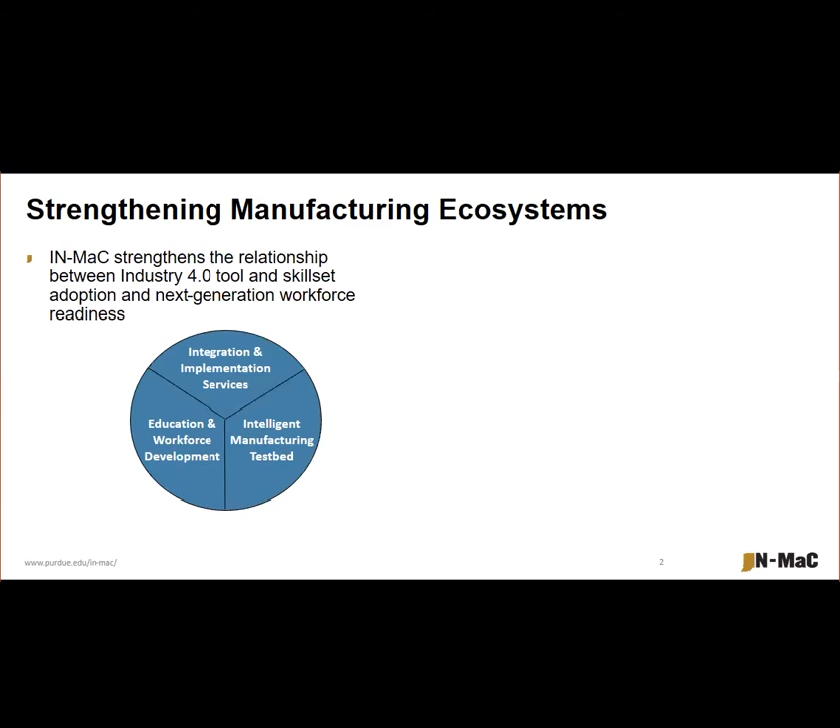We offer integration and implementation services in which we work with companies at their sites across Indiana to implement modernization projects. And more recently, we've added the Intelligent Manufacturing Testbed facility, which is a center that investigates ways for all manufacturers, regardless of their size, to overcome barriers to achieve Industry 4.0 in ways that work for them.

Two more remarks about the testbed facility. We do conduct research in smart manufacturing and the digital twin across all levels of the manufacturing enterprise. The center provides a platform for industry to develop and validate technologies to integrate and manage data streams across the product lifecycle and entire value chain.

The center includes a fantastic array of real-life production assets, including lightweight composites manufacture, injection molding, subtractive machining, subassembly, supported by rapid prototyping capabilities through integrated design and simulation suites, as well as some additive manufacture tools. Integrated into our manufacturing operations are also metrology equipment, in which we can provide rapid validation at the manufacturing cell, as well as offline. And through the manufacture of these real products, we leverage IoT technologies and real-time information streams to study and showcase ways to achieve Industry 4.0.

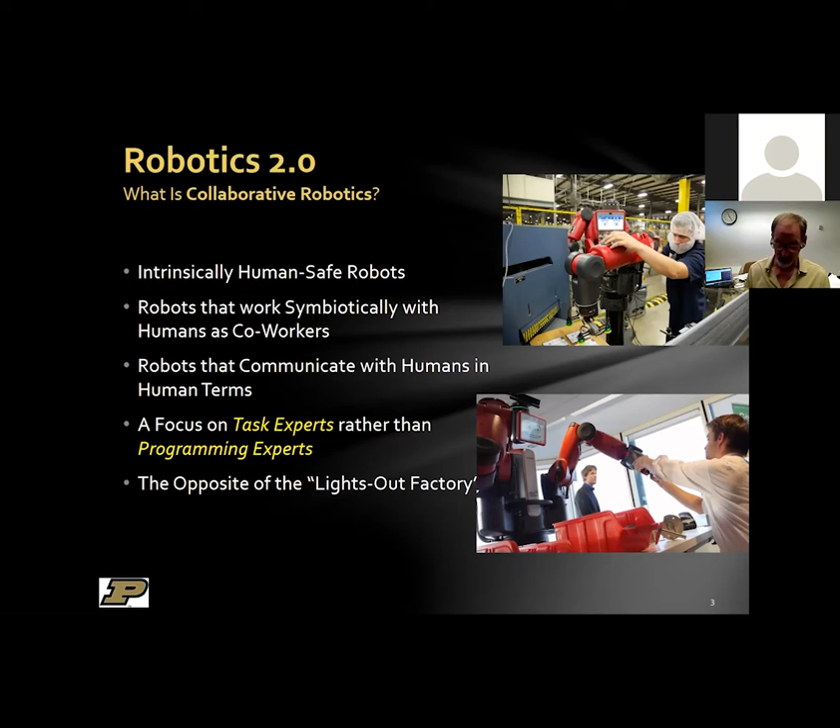And so again, we've been calling this Robotics 2.0. Let's also look back at what we meant by Robotics 1.0. I mentioned the lights-out factories, and that really was the goal for the first few decades of robotic development and deployment—the idea that there are certain dull, dirty, dangerous tasks that equivalently dull, dirty, dangerous robots could do.

In a manufacturing environment with no humans at all—the idea of full automation. That was this idea of the lights-out factory, and the idea behind it was that humans only needed to be in there to go and fix or repair the robots.

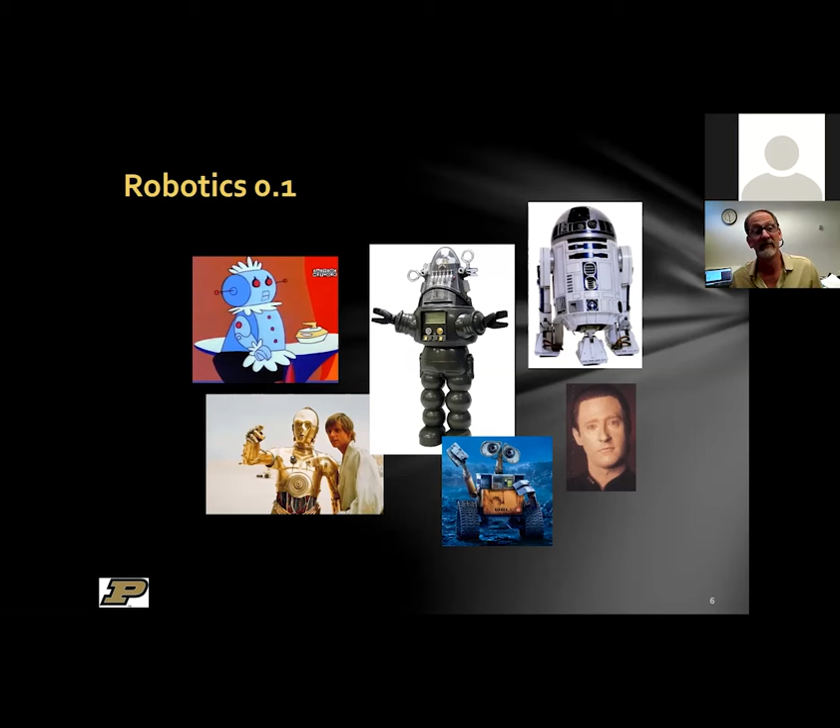But an interesting thing I like to point out about all these examples from science fiction is that in fact they're all helper robots. All these visions from our science fiction precursor to real robots interestingly focused not on the idea of the lights-out factory, but on the idea of symbiotic robots.

Nonetheless, popular application areas that robots are popping up, whether they're robots 2.0 or robots 1.0, co-robots or traditional, is many of these same areas: palletizing and depalletizing, material handling, machine tending, and of course quality inspection and assembly - we're seeing a lot more. These are kind of the classic hot button applications, at least the bulk of things, but they're going into many different areas as well.

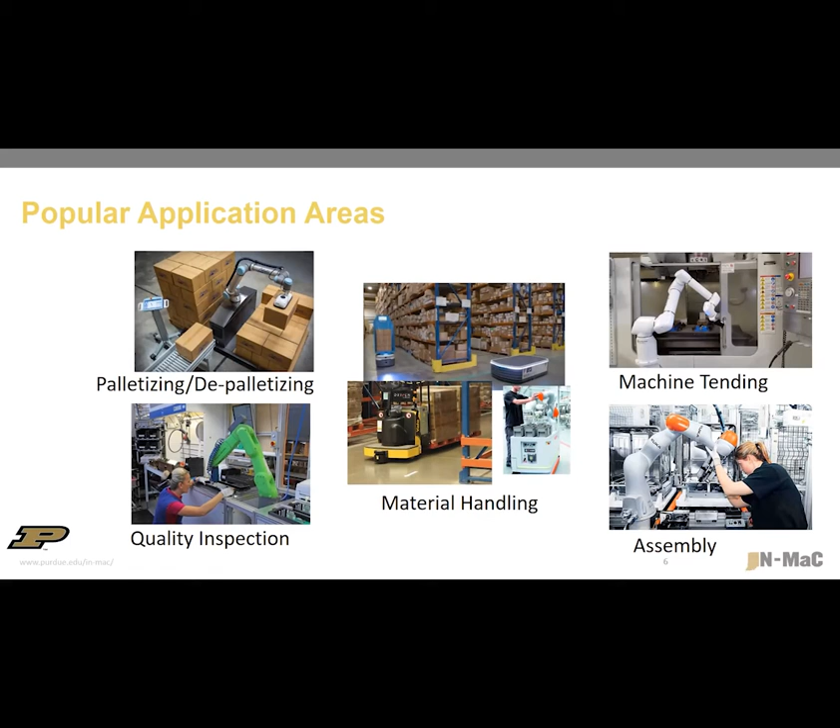When we're integrating a co-robot, a traditional rule of thumb has always been that the cost of integrating a robot into a manufacturing process generally costs 4 to 10 times the cost of the robot. The reason being, you have to do a risk assessment, pay for safeties and guards. There's a lot of feeding of parts and fixtures to register the parts, part presentation, the grippers themselves and part handling, conveyors and such. And of course a big effort is the software programming and integration with surrounding systems.

So when you're talking a cost of the robot on the order of $40,000 to $140,000, the overall cost by this rule of thumb is around $160,000 to over $1 million. But co-robots, one of the areas they're trying to reduce those costs is obviously the guards and safety systems are built into the robot - they're intrinsically safe, that's a way to save money. But the big issue is in integration and programming.

We're trying to make these interact with humans and traditional workers rather than bringing in programming experts all the time. And I want to point out, you still have to do a risk assessment even with cobots, but they are safe within manufacturing safety guidelines. The big ISO standard on safety is 10218 - that's been around for a long time, dealing with robots and robotic devices. There's this new standard, ISO 15066, which is the specific ISO standard on collaborative robots.

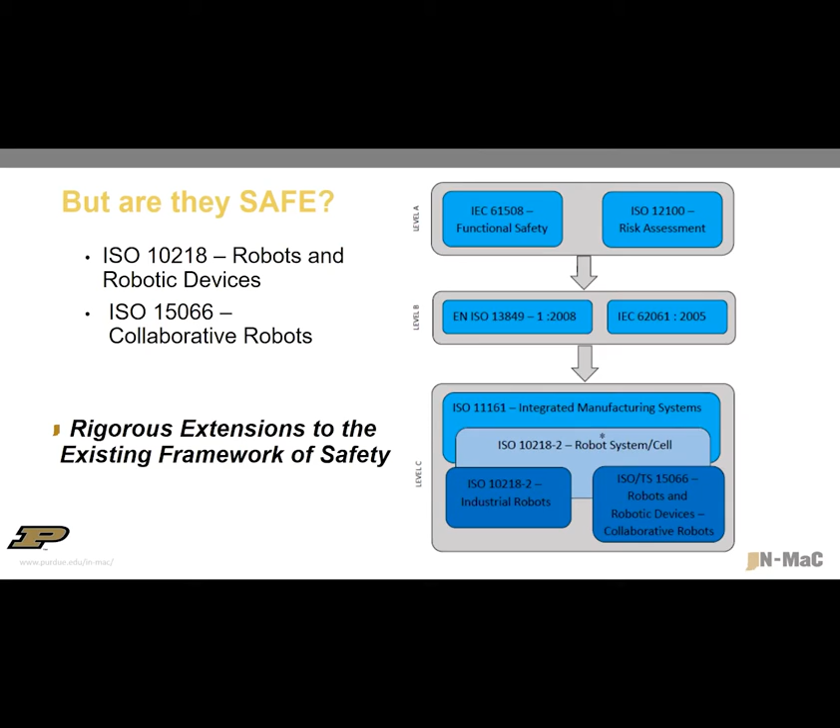And that's how this fits into the existing safety within the plant. This just allows for specific types of robots only - the elimination of certain types of fencing, but it's not an elimination of safety. It's an exchange of maintaining safe systems. I'm not going to go into the details of what the standard is, but just keep in mind that it is within the recognized ISO standards for safety.

So as we talk more about cost modeling, as I hand this off to our next presenter, I want to keep in mind these key considerations, whether it's robots versus cobots, 1.0 versus 2.0. Cobots still require a risk assessment. They are intrinsically safe, but you have to be concerned about the overall work cell, because safe robots can do dangerous things if given sharp things and that sort of thing. So a risk assessment is still necessary.

Many of the existing cobot applications we see out there on the factory floor are really traditional 1.0 kind of applications, just without the speed and the fences of a traditional 1.0 application. And that's a key aspect - cobots rely on lower speeds.

So when you're trying to get into collaborative robotics, it's important to think: is it really appropriate for my manufacturing task, particularly if you have an existing line with an existing takt time? Is it going to fit? One key aspect is if it's truly collaborative - if the human's doing something and the robot's doing something, what's going to happen if the human gets distracted? And as I'll say in closing, a broken arm does meet the ISO definition of a recoverable impairment.

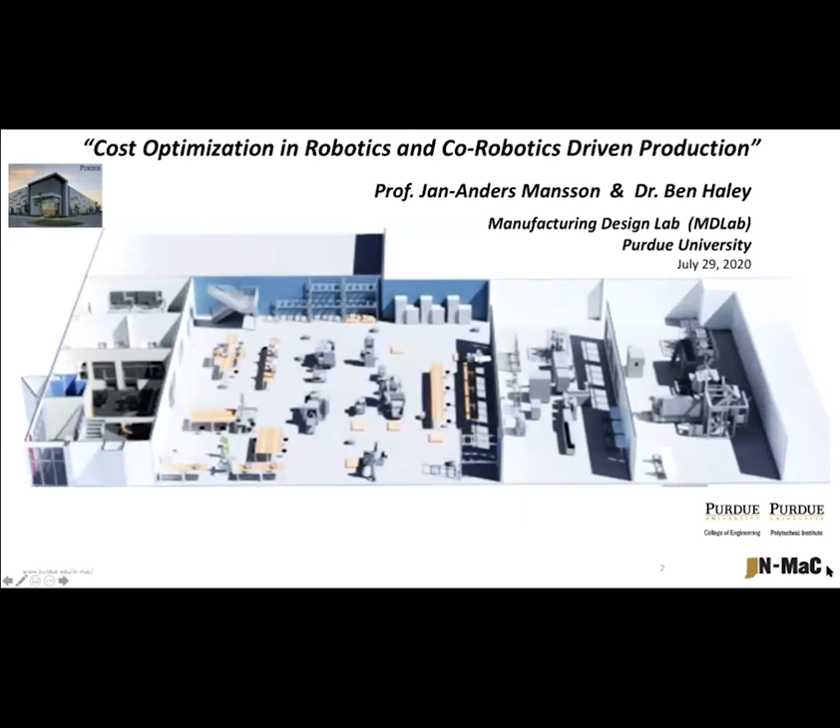So what we are going to look at is how can we estimate the cost advantages of different manufacturing alternatives. In this particular case we discuss today, it's low automation versus high automation. How can we get an idea about the cost?

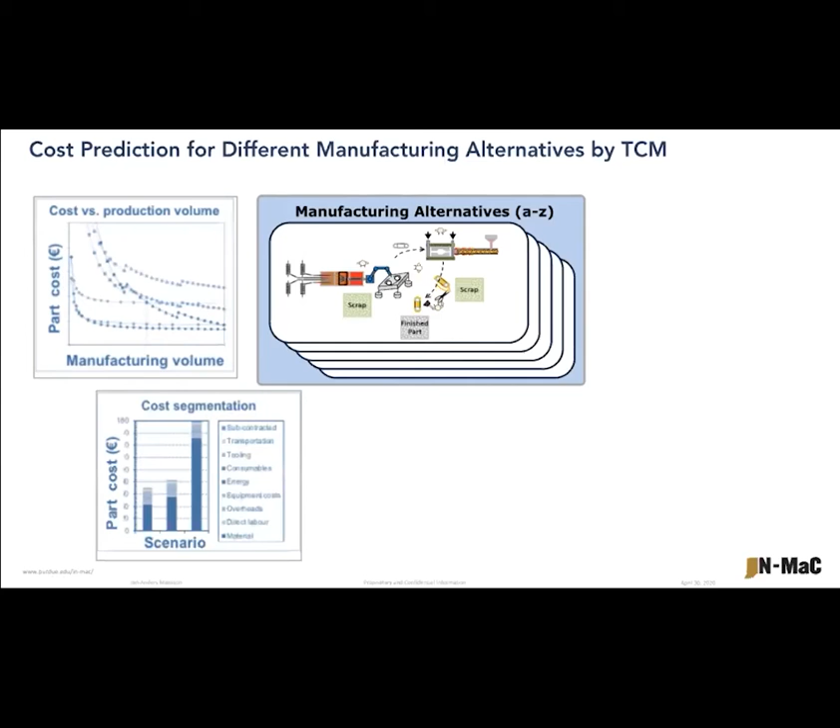This is based on work we do here in technical cost modeling. By setting up different production setups that Ben will show later on, how can we look at part cost versus volume? What is the cost segmentation? What is energy cost, tool cost, labor cost, investment cost?

And what is the potential, or what is the return of investment? Of course, when we invest in robots, we have a capital cost coming with it. And what is the cost sensitive to? This is more or less what our cost modeling tool provides.

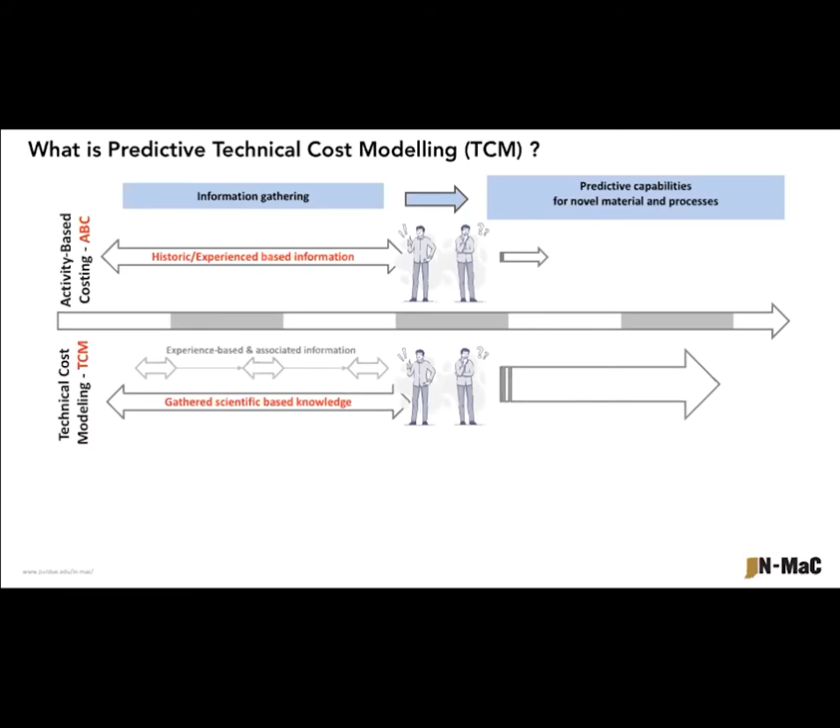Just to give you an idea what we mean by technical cost modeling, I'm sure most of you are familiar with ABC costing, activity-based costing, where you have information from history of your production, and by that you predict how the new setup will be. In the case when you go into new technology, new materials, or new equipment, you don't have enough history information. You have to take into account scientific information from that process or material. Technical cost modeling helps us have a better understanding of the predictive cost of our product, which is valuable when we want to implement new techniques or new equipment in manufacturing.

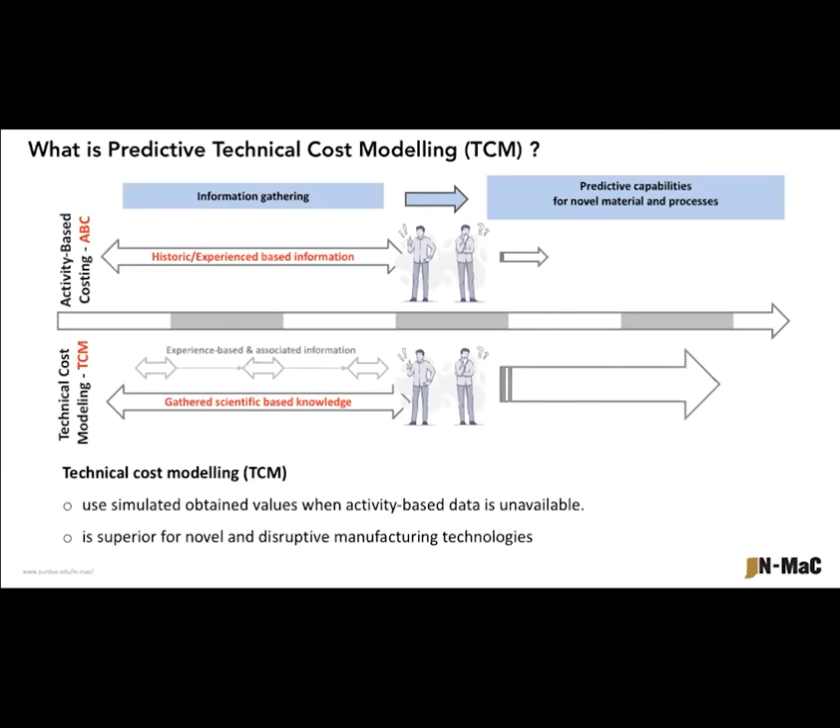This said, when we talk about cost here, we have to make it clear: if you look at the cost of the product when it's sold, it has everything including tax and profit. We are focusing on the manufacturing cost, what is variable and fixed cost. That's equipment, installation and purchase if needed, maintenance, plant operation, tooling, material costs, labor costs, consumables, and utility cost. That's the cost parameters we are referring to.

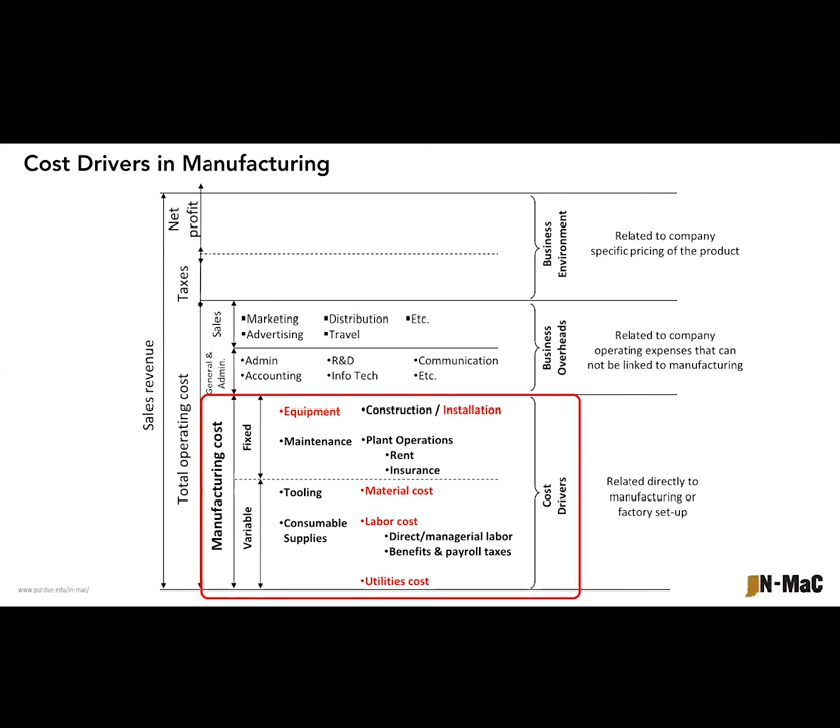In the next example here, we will show a made-up example so you understand how this technical cost modeling works. With this, I leave the word to you, Ben, and I will start this here and you take over.

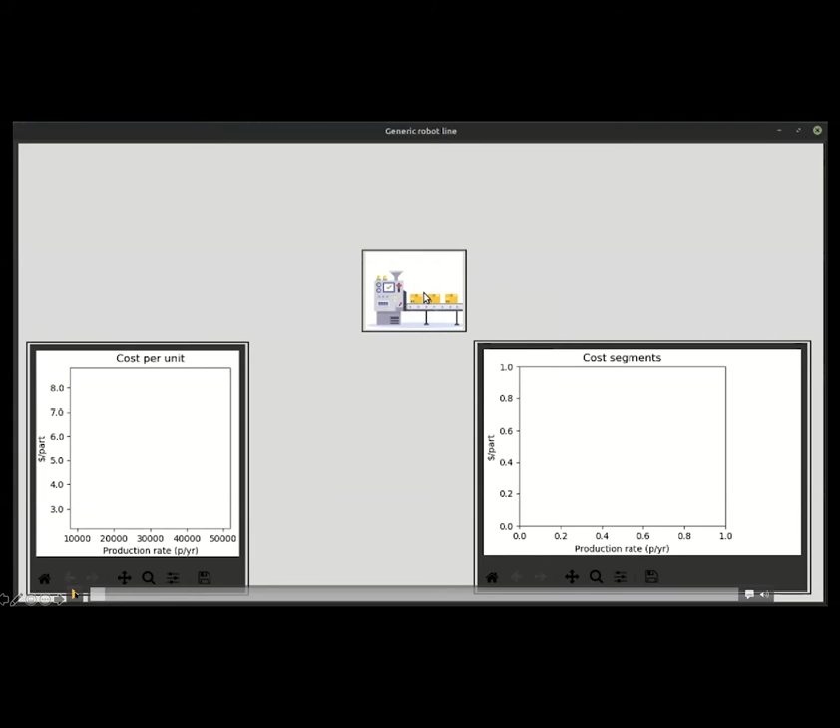Okay, can everybody hear me? Good. All right, so we've developed this software tool in N-MaC and MD Lab that allows us to lay out a manufacturing line in software. This is a simple demonstration of the capabilities.

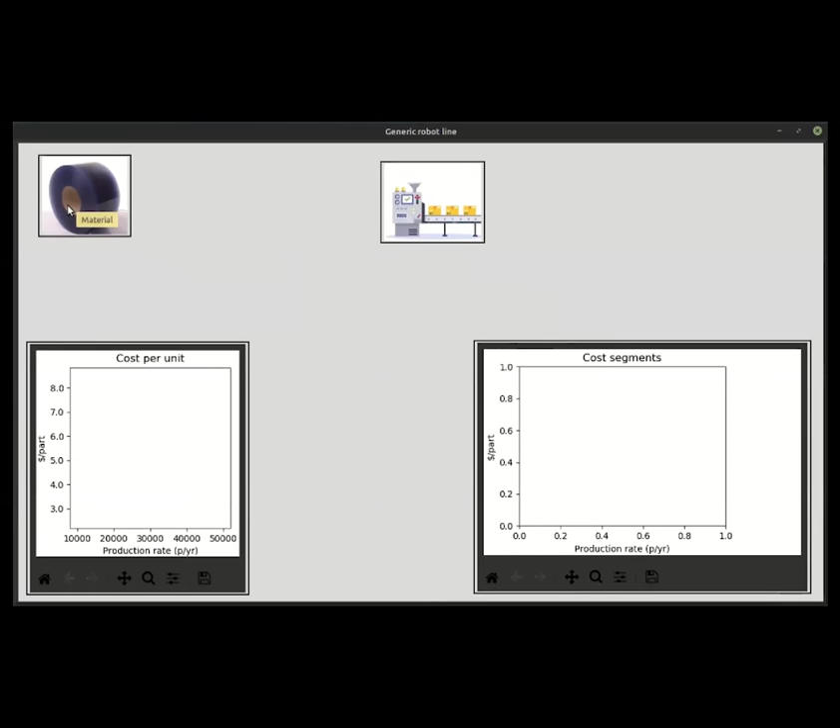So we have in this example just a simple machine, a generic abstract machine that takes in some material and produces widgets that need to be transported to a warehouse. We have different methods of operating the machine, starting with a human operating it. We also have choices about how to transport the finished goods from the machine to the warehouse, starting with the human doing that transport job as well.

Once we've laid out all the steps in our simple process here, we can connect them up. And once everything is connected, we can look at the overall costs and start to do some simple analysis on which cost segments are driving the cost at each stage.

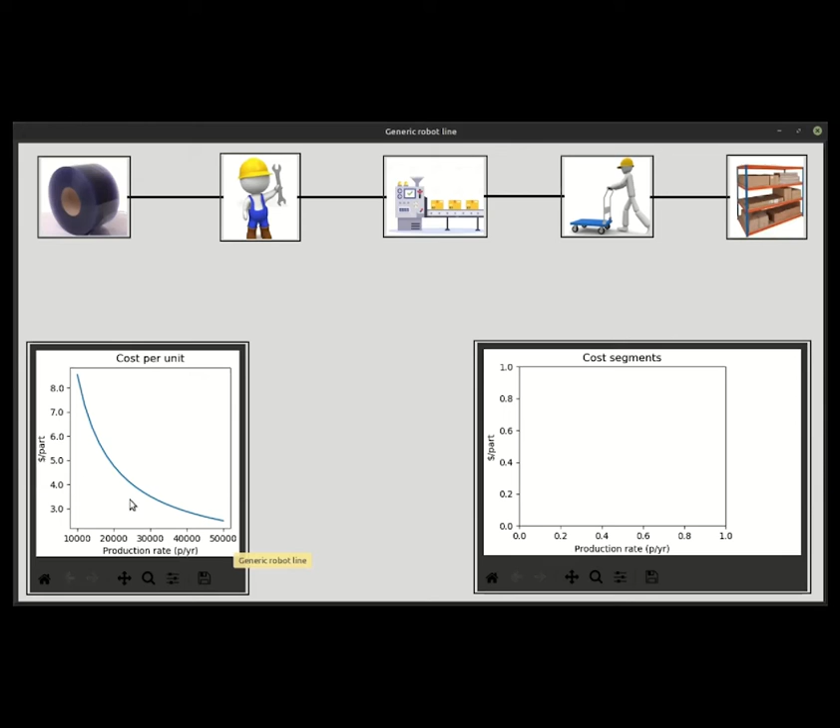We have a couple of plots at the bottom showing, first, the cost per unit manufactured. The x-axis is the production rate, varying from 10,000 parts a year to 50,000 parts a year. The y-axis is the cost per part, varying from over $8 per part down to less than $3 per part. The other plot shows how those costs break down into different segments, so we can track how much of each part is going to capital, labor, training, electrical power, and material costs.

Again, this is a simple example with just a few categories. We're demonstrating what we can do with this tool. We have a few parameters that we can vary for each one of these steps here.

If we change the hourly wage of the human operator, we can see live in the plots the impact on the cost and the cost segments, how the costs are broken down. Similarly, if we change the wage of the human doing the transport, or with the machine, which has a fixed cost maybe of $250,000, if we amortize that over 12 years rather than a 10-year lifetime, we can see again how the costs change. So these are the kinds of calculations we can do with this.

So in a robotics 1.0 approach that Professor Voyles mentioned, we can start to modify this line. We can say let's take the human transport out and replace it with an automated vehicle, a robot transport. So this robot would take the finished products out of the machine and transport it to the warehouse. We can just in the software change this up and see what the effects will be on our costs.

So once we have that line reconfigured, we can go and update our plots, and we can see the change in the unit cost from over $8 per part to less than $7 per part at low production rates. And we can also see the change in the cost segments. The cost now is not quite so dominated by labor.

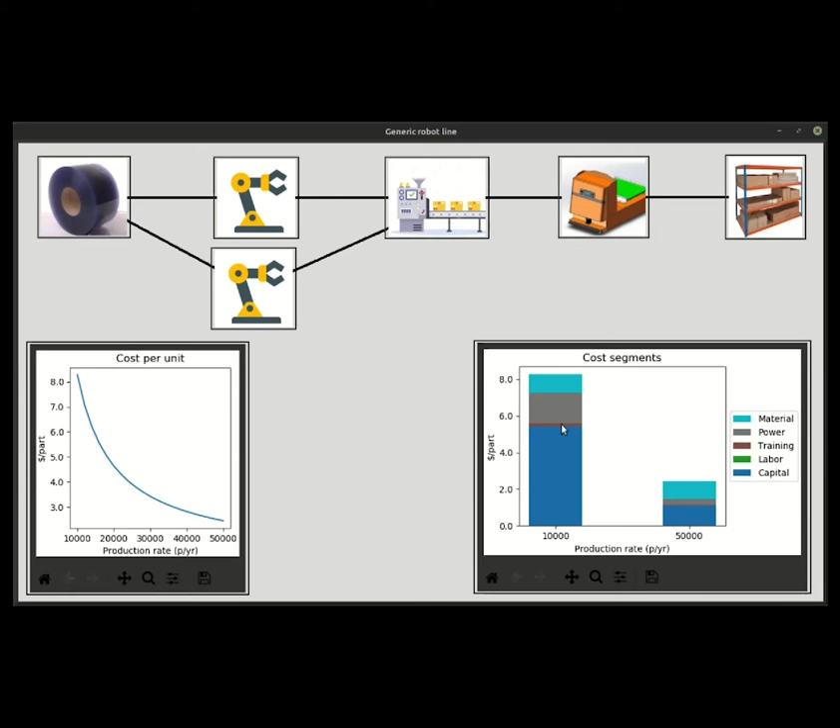We'll see in this example that's actually not a good move. It increases our cost per part, and that's largely due, when we look at the cost segments, to the increased capital expense. So we know just by playing with the different configurations in this software, we can explore different options with this simple manufacturing line.

Another thing that we can do is break out the specific costs and identify the cost drivers for each of these steps that are changing. So at low automation, we see the costs are driven by high labor costs. And when we go to high automation, the main cost drivers are capital and electrical power, both for low production volume and also for high production volume.

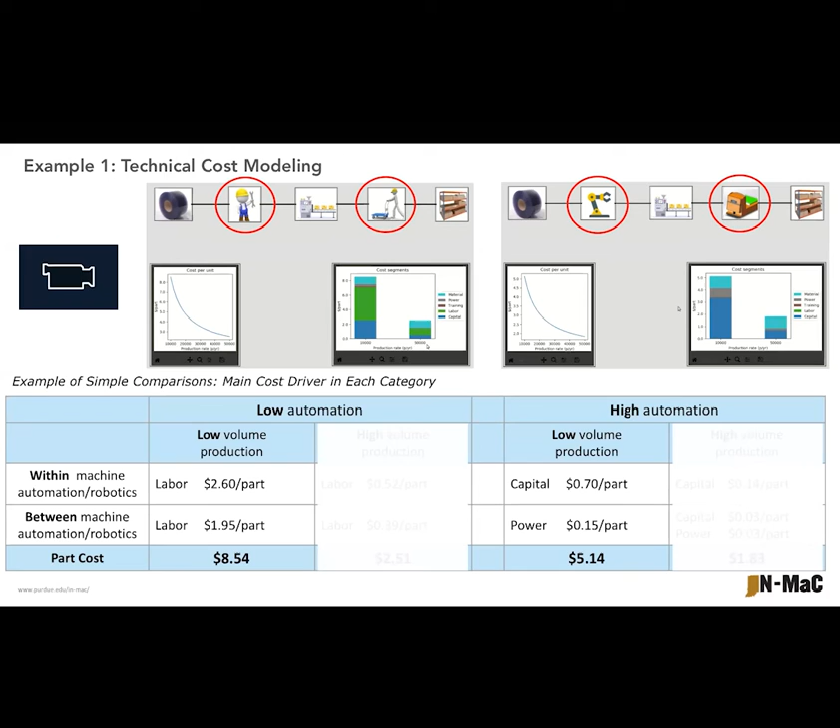If we go to the next, there you go, you see the same effect for high production volume. Labor costs are dominant at low automation, and capital and power dominate at high automation. Again, this is a made-up example to demonstrate what we can do with this tool. In the next example, you'll see a bit more involved calculation with many more parameters for something that we're actually doing here in the test bed at INMAC. So with that, I'll hand control back to Jan Anders.

Okay, so what you saw here is the principle of how the cost modeling tool works. It's drag and drop, easy to use, to get an estimation of what advantage I will have from a change I make in my production.

One thing should be said here, it's always very dependent on if the robot is dedicated just to this process or it's utilization based, meaning it can be used for other operations. And one of the advantages with a collaborative robot is it's easier to move for different operations. Sometimes we can go from a more high cost dedicated line to a utilization based robot, and that will bring down the cost. There is an advantage.

The next example here is a process that we have here at the test bed. And this is a new way of making composite parts, continuous fiber, carbon fiber parts. We primarily work with automotive here, examples with Volvo, Hyundai, and Ford in these examples.

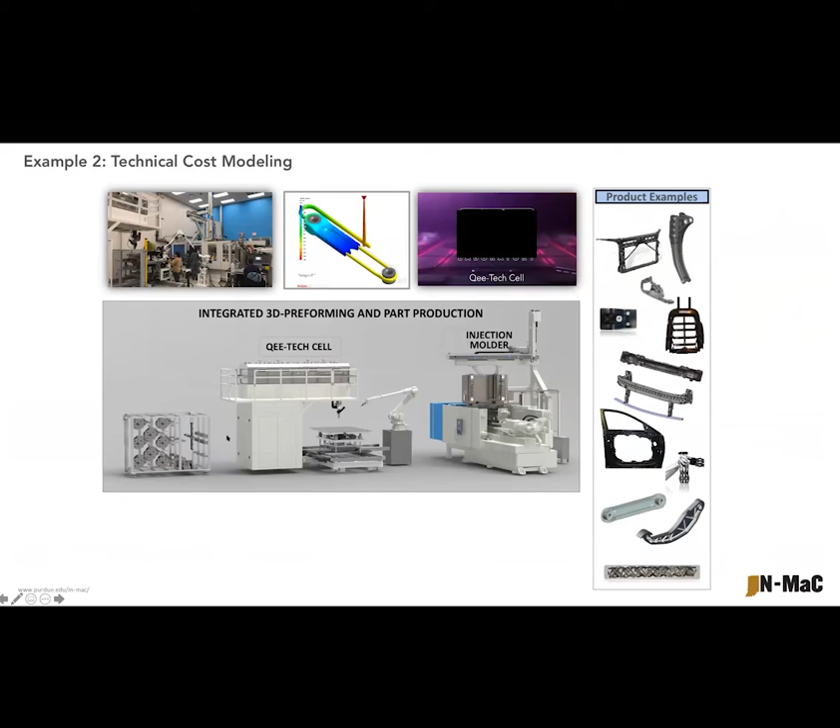So the process is that you start with your composite raw material, you make a skeleton that has all the load bearing capability. You do a second operation where you cover it, overmold it, and you have your final part. This is a simple link arm, but we have worked also with larger examples like car doors and so on. Let me show you a video here so you have an understanding of this process. And of course, you're more than welcome, when we can travel around, to come and see it.

So here you have the setup, the raw material. This is an oven. Here is a 3-axis table and a 3-axis movement of the head, so it's 6 axes together. We can create any shape that we want for this load-bearing skeleton. It's kind of a 3D printing, but the cycle time here lies between 1 and 2 minutes to make, also for making a car door.

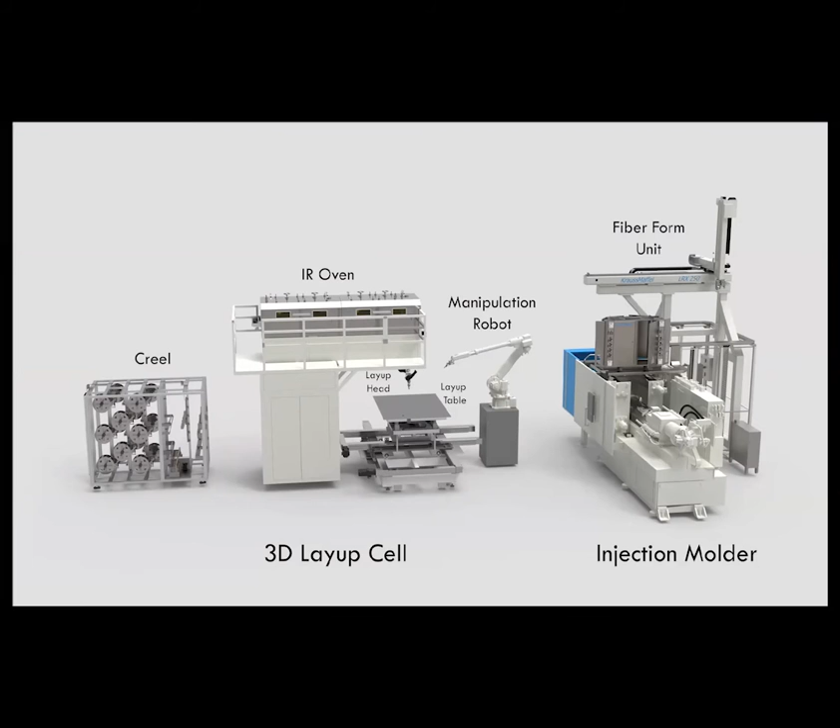Here is the raw material. You can follow the red dot here to the left. Here is the preheating, and here is the fixture for the layup of this skeleton. In this case, a very simple one. You see it laying around some bushings. That is going to be the load introduction point in the application.

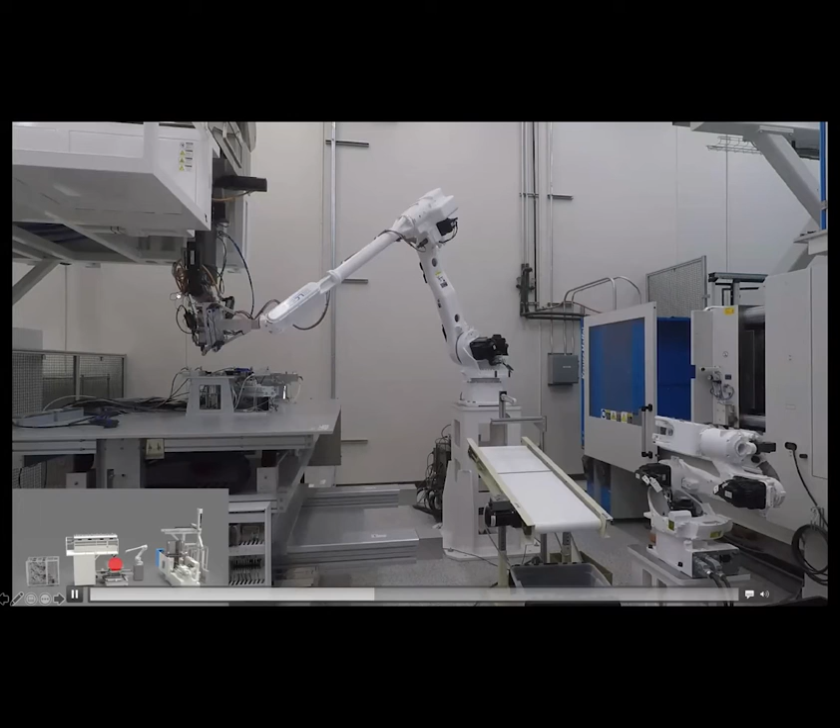Then it's handled. So the first one, this one to the left, is kind of a robot as well, but this is then the manipulation robot that handles the skeleton, and it's taking it into the injection molding machine. We say this looks very slow because it's done here with all safety precaution to not destroy anything of the equipment. Here it takes the finished part and it loads the new skeleton for the subsequent molding.

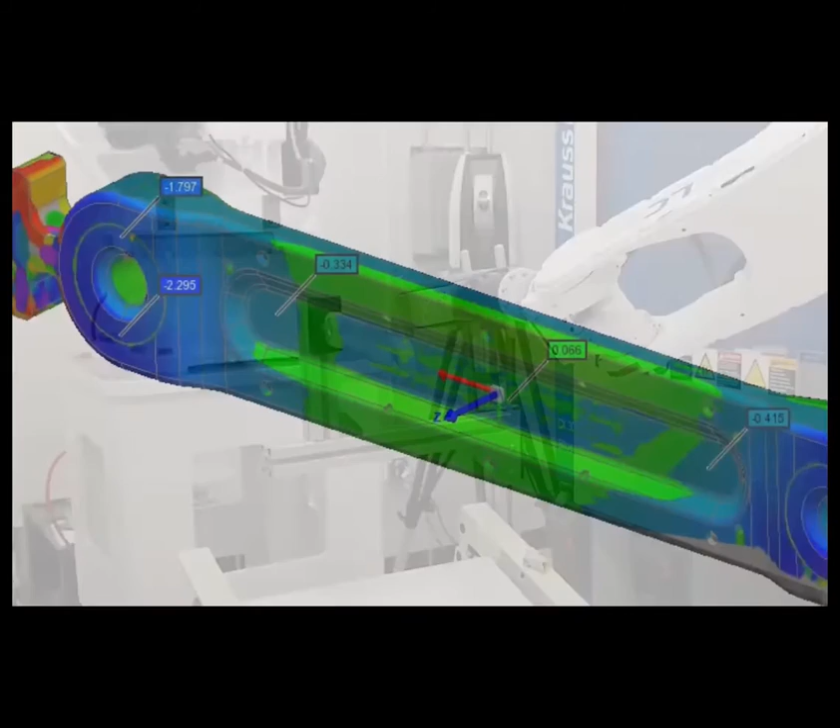It takes it out, and then there comes another robot that does the scanning, for dimensional control. So we have a full scanning of the product done with a Hexagon Leica system. So here you see the two elements, first the skeleton and then the finished part.

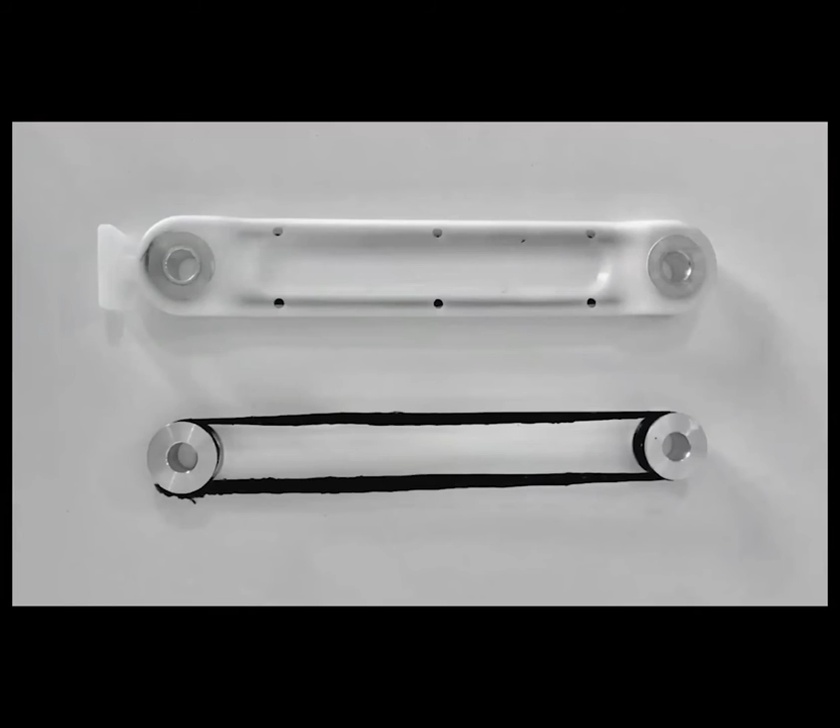So now you have an understanding of the process, and of course you saw there are at least 2 robots involved. So let's look now at 2 cases. We should say this is based on 300,000 parts per year, 3 shifts, 8 hours each, and 240 days per year. Here in this case, this is the setup, and around the ring here you can see the 2 robots.

In the low automation case, these 2 robots are replaced by a person operating this transfer and the quality check. Here you can see the investment on the left for this setup, it's about 1 million. And here it's about 125 less, and that more or less reflects the cost of the 2 robots that are taken out.

And as mentioned, in this case we are looking at manufacturing costs, but now we take in all the costs that we have associated with this. All those cost drivers, of course, are equipment, all the consumables, indirect and direct labor, compressed air, sewage, water, energy, plant operation, tool costs, and material. It covers all the cost drivers that are related to this process.

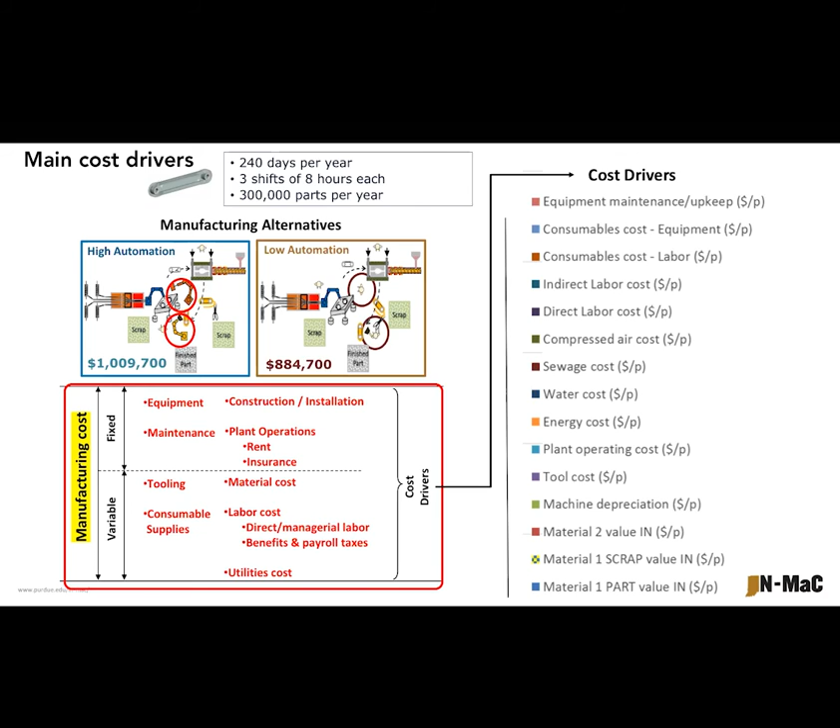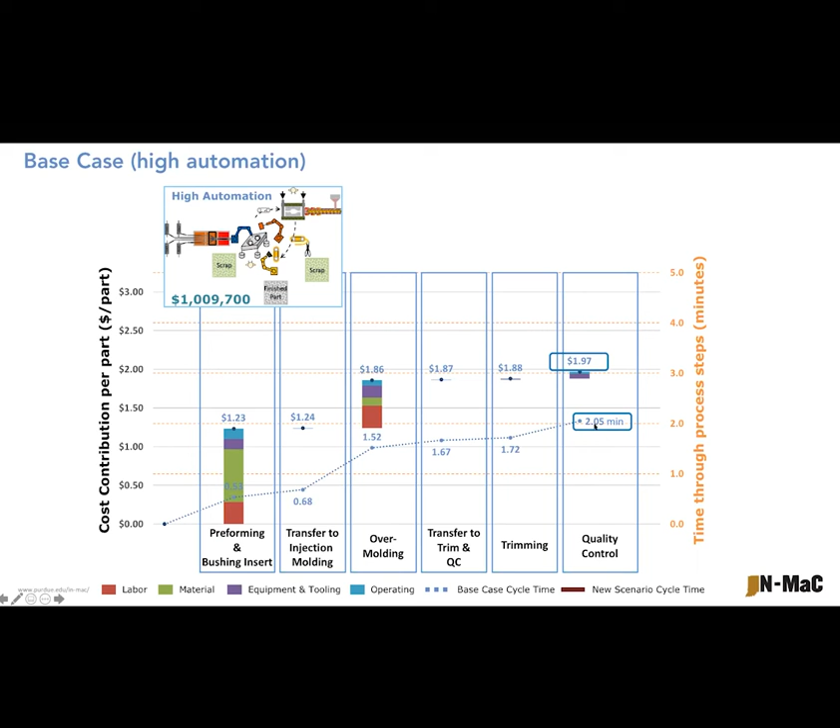So now we have got an idea of what this change in automation will cause us.

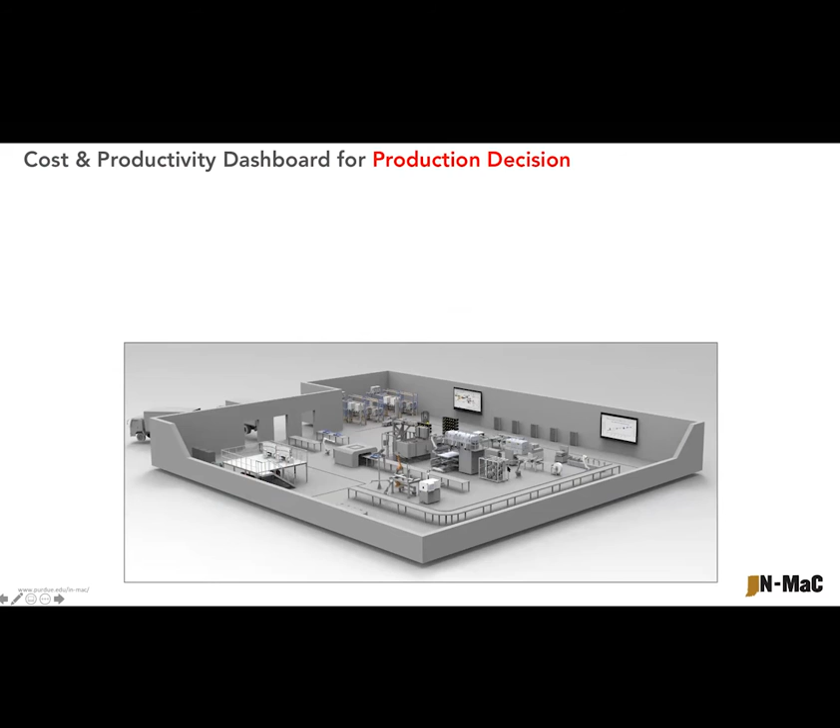So now if we go back to the test bed here at IMI, the equipment here in the middle is the equipment that you have seen on the video. Now we put sensors in as many places as we possibly can and have them interacting with the sensors of the production line. Now we talk sensors in the equipment. We can also have sensors in the application. And this information is then coordinated and shown on these screens that are on the wall in the manufacturing floor.

So here you can see the 2 cases, and you can follow the cost evolution, if you do a change, what will happen to the final cost or the different cost segmentations. So this is a way to move the information down to the production floor, so more people can be part of influencing the cost of the product.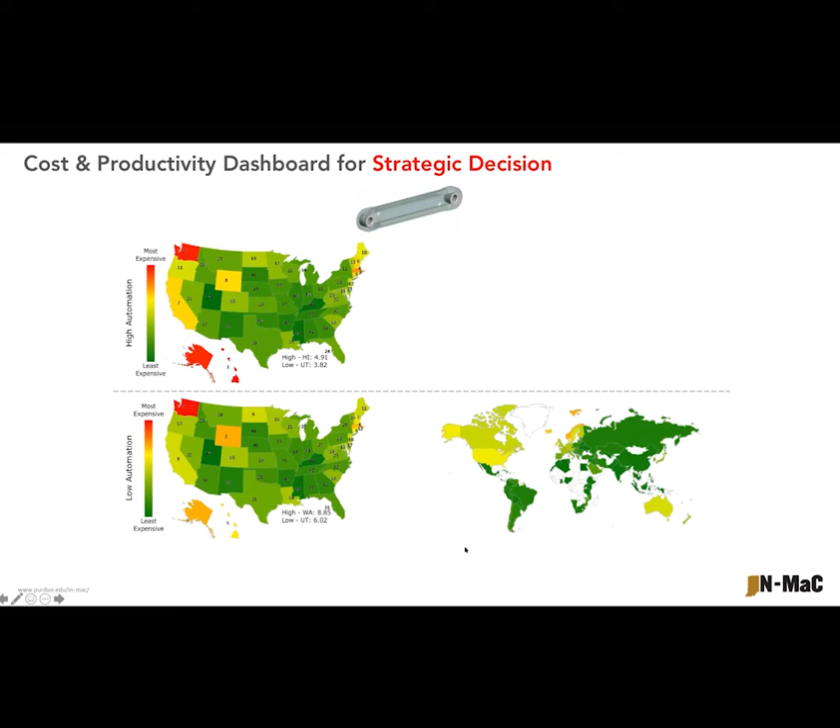And if we go to a high automation case, how it might change. This is related to energy costs and labor costs in different states. But we also looked on a global scale with data we had from a federal system here. One thing you can see: you should not produce in Norway, it's the least favorable if you have a low automation case. And if you're going to move a low automation production from Asia to America, the price will more than double on this part.

Now if we go to a high automation case and look at moving it, it's about a 50% cost increase of the part. And then you can say if in Asia they want to go to a high automation case, they gain maybe 8%, while we here will gain over 60% going to high automation. So you can see the competitiveness by automation if you compare on a global scale.

So what we have shown you here now is what we have in this part of the testbed. Here we make the raw material, here is the rest of the activity—subtractive manufacturing and also assembling. But it's all now being connected up, so we have all information flow going between the two sides.

This intelligent manufacturing testbed that we have here is really to be a platform for you—industry and university—to work in, to help accelerate digital transformation. Maybe before you start to involve too much of your own company and too much disruption of production, this could be a place where you can test and also get help with cost estimation. It's also to prepare students, teaching, and workforce development, with courses here at the testbed. And of course, being a network place where we hope we can help accelerate this kind of step in the Indiana industry.

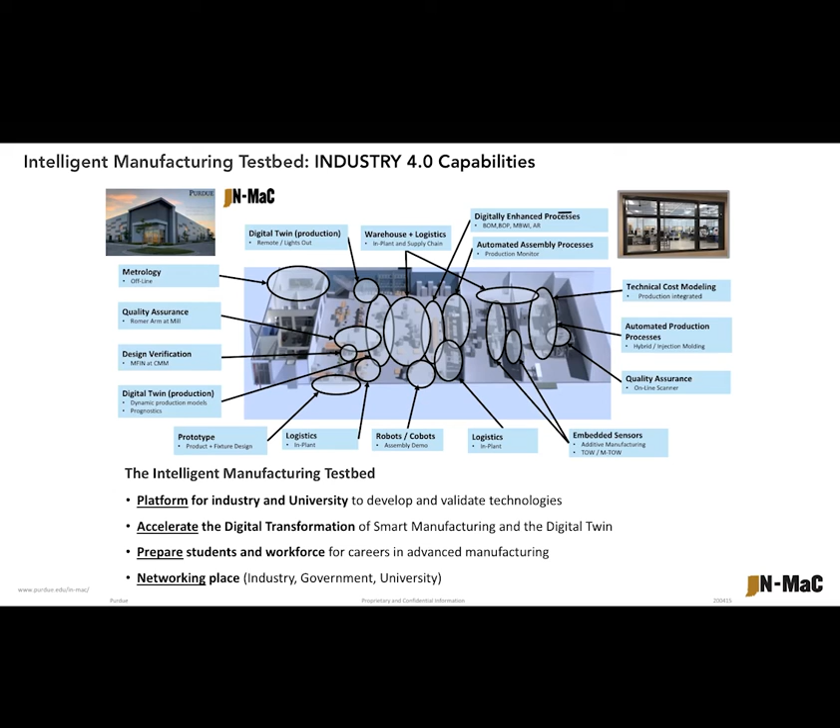I think by that, I'll now leave it over to Dave, who will talk about Industry 4.0 robot alternatives and how that can impact different examples that he will show.

Okay, thanks everybody. So as we mentioned, we're using collaborative robots, or co-robots. You can get all the same advantages that you just saw with automation, but they're even more dramatic in this case, since the co-robots themselves are cheaper, more flexible, and safer, so you can deploy them more places without a lot of changes to your current workflows or shop layouts.

So the first characteristic you want to consider is the payload—what's the total weight your robot will need to carry? Most of these robots' payloads do not include the gripper, so you need to factor in the weight the gripper might have, plus about 20% more for your part variability. The next characteristic is the reach—what's the farthest distance your robot will need to reach once it's mounted, including the drop-off location?

And depending on how complicated your workspace is, that would dictate how many degrees of freedom, or number of axes, your robot needs. For more complicated types of interactions or workspaces, you'll need an increased number of axes. And then repeatability—what repeatability is needed for your task? How precise do you need your robot to be when repeating these tasks?

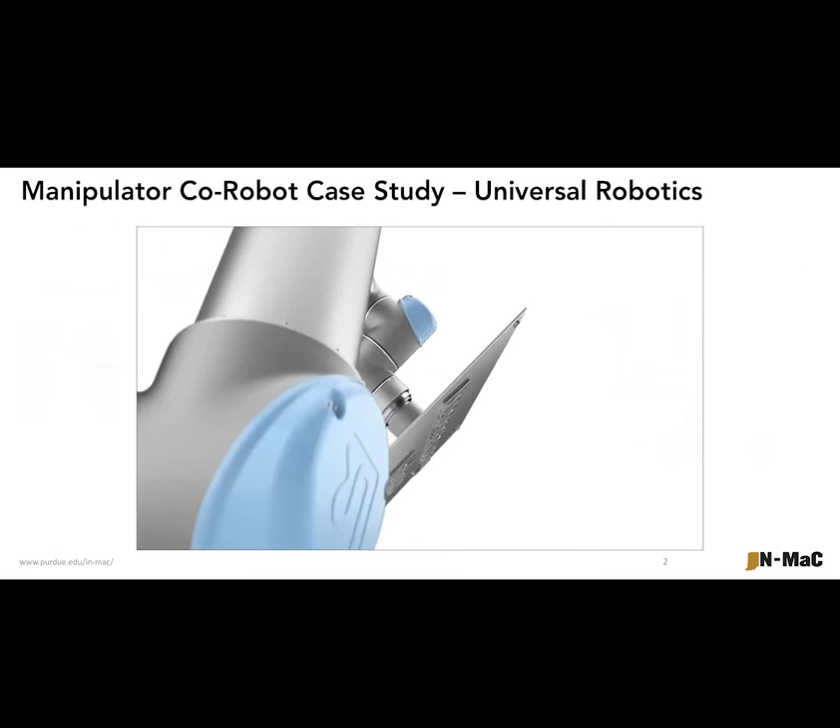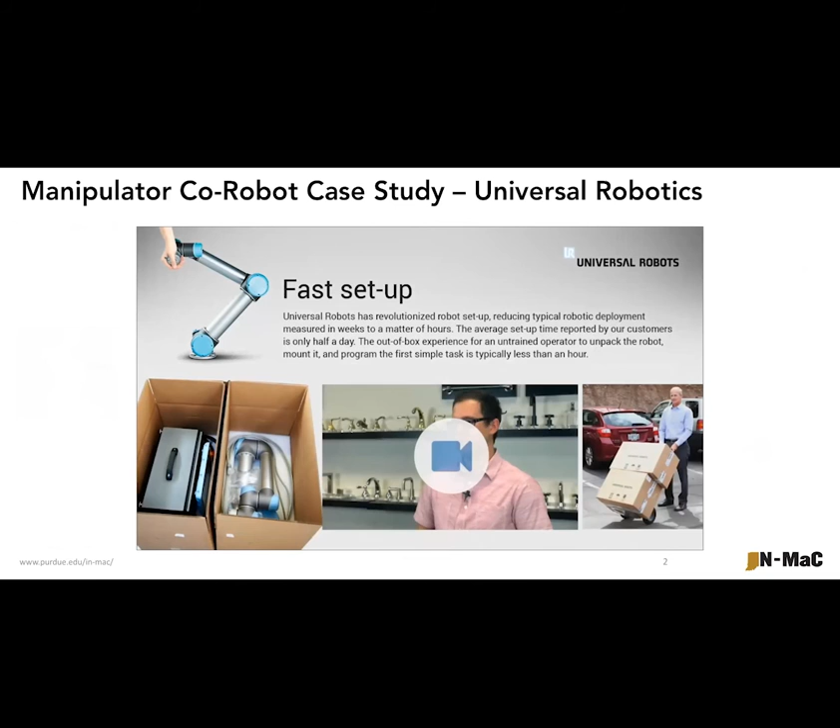Once it actually hit the floor, we got it unboxed and found a stand for it. Within 45 minutes, we had it up, powered, and were actually programming the robot, just doing simple back and forths and pick and place. It was really easy to use. I'd say it took a third to half of the implementation time out of it based on previous experiences I've had.

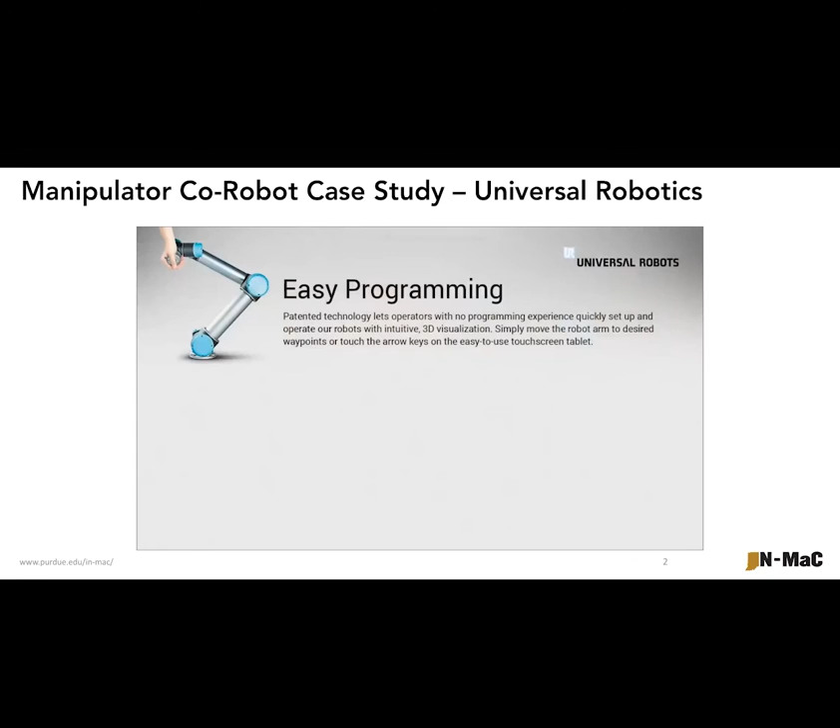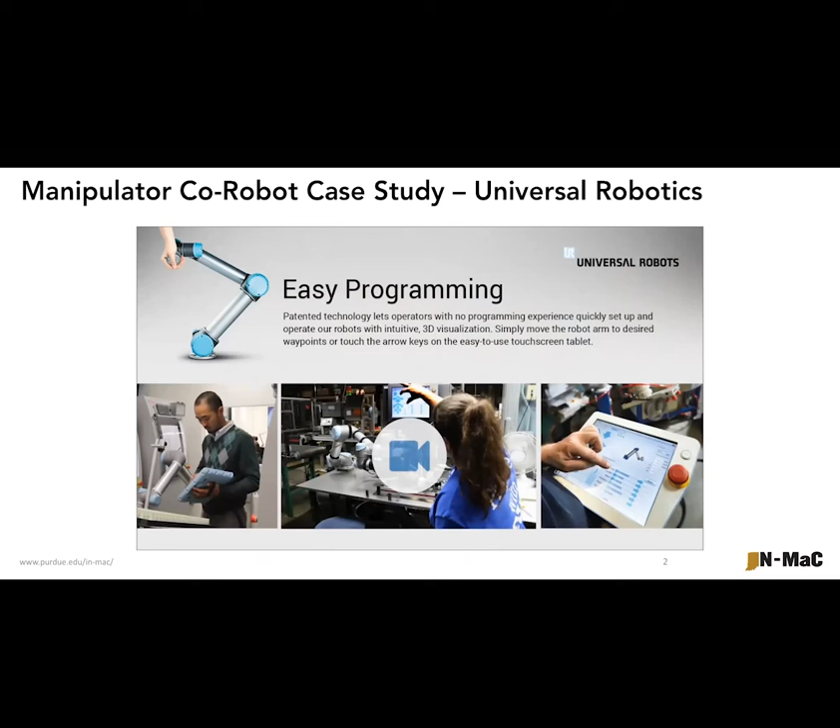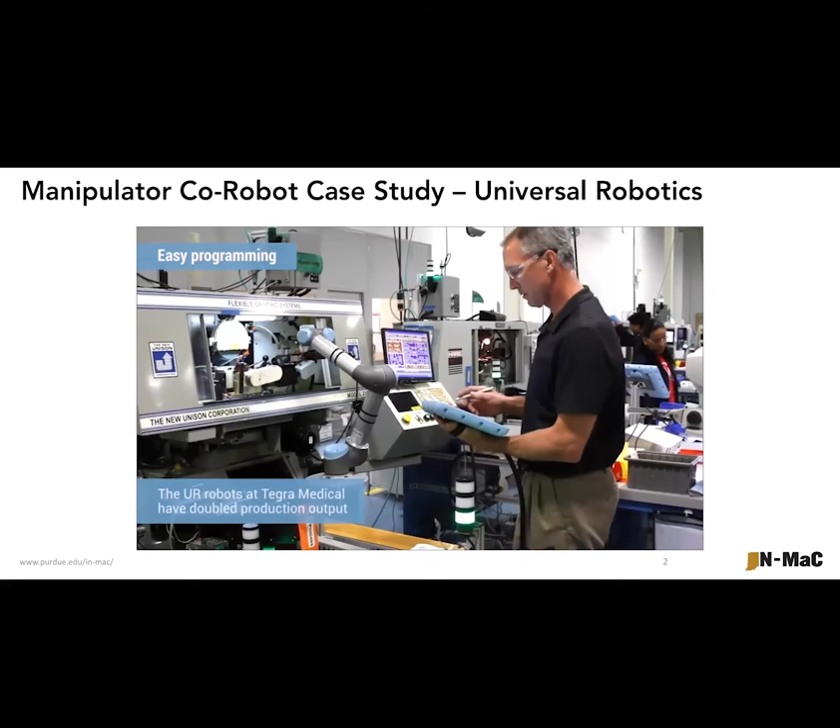The process of the robots were actually a lot simpler than I had expected them to be. If you can work a smartphone, you can pretty much work these robots. Programming the universal robot is very straightforward. Anyone with any sort of ability to think logically and can envision how a process ought to run could program the robot.

The screens are laid out friendly. The commands are almost self-intuitive. It comes with a manual that you can consult if you need to, but you don't need much of that.

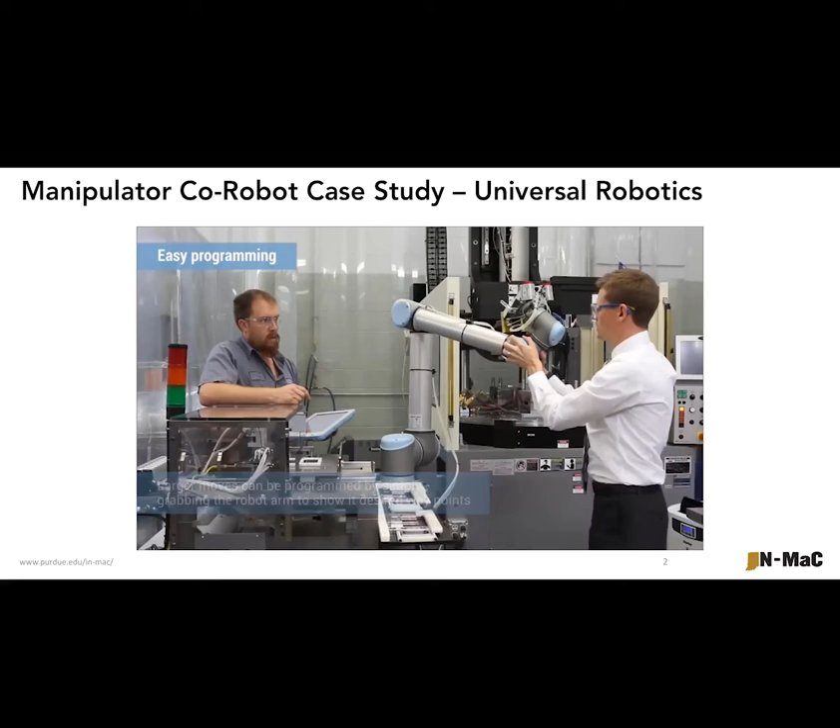When you push the button on the teach pendant, you can grab the end of arm and move it to whatever position you want, and then once you release it, it can set the position and teach it as a point. It made it a lot faster and easier to program that way. Honestly, if you can write a to-do list, you can program a robot. It's just simple top down logic, and it's fairly simple to do.

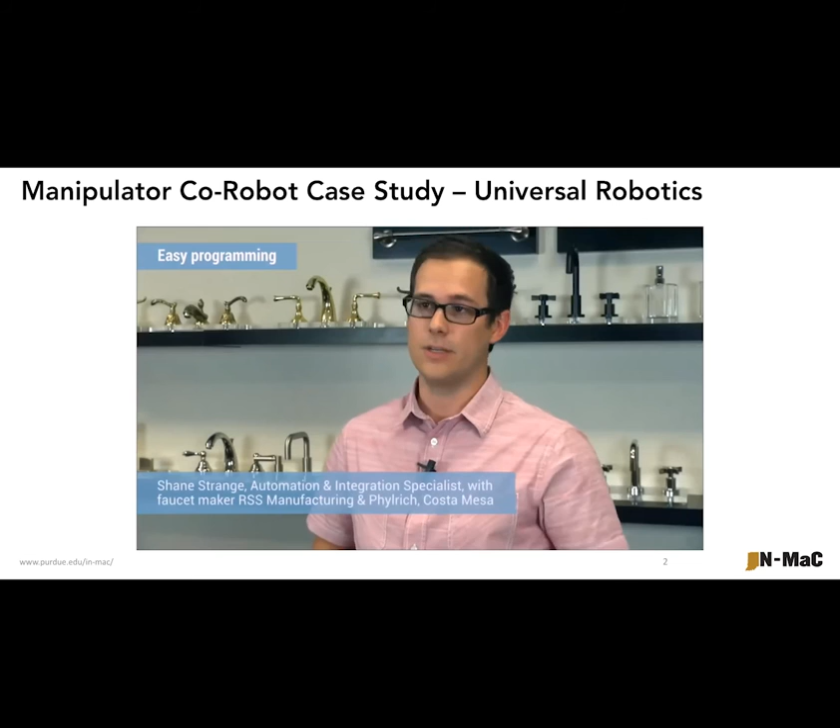The most beneficial part of the robot is actually the interface controls. You're right there with the robot, troubleshooting as you go. It takes out a lot of time, rather than me having to come inside the office, run simulations of my programs, take it back out, boot it up, and see real time what it's going to look like. You can actually do that from the handle.

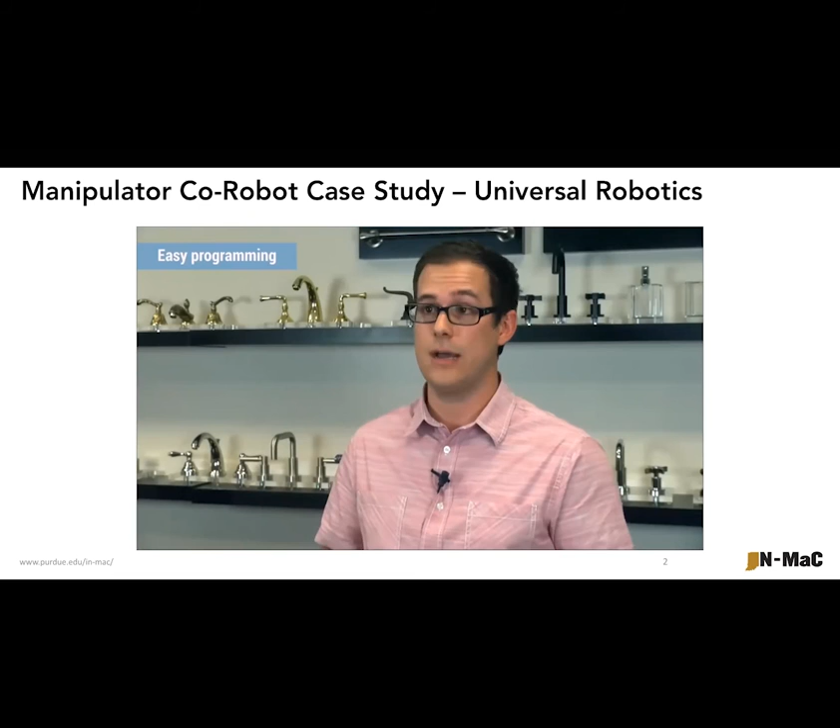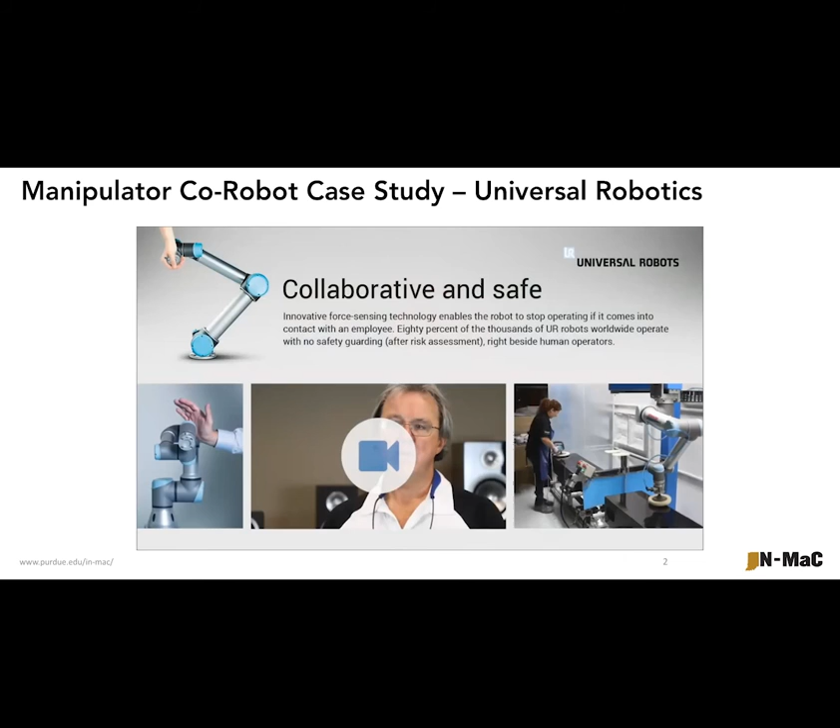The collaborative robot allowed us to have the robot and a human working in the same workspace. They're working in a tandem type of operation where they can safely interact. It's a very hand-in-hand kind of operation between the two.

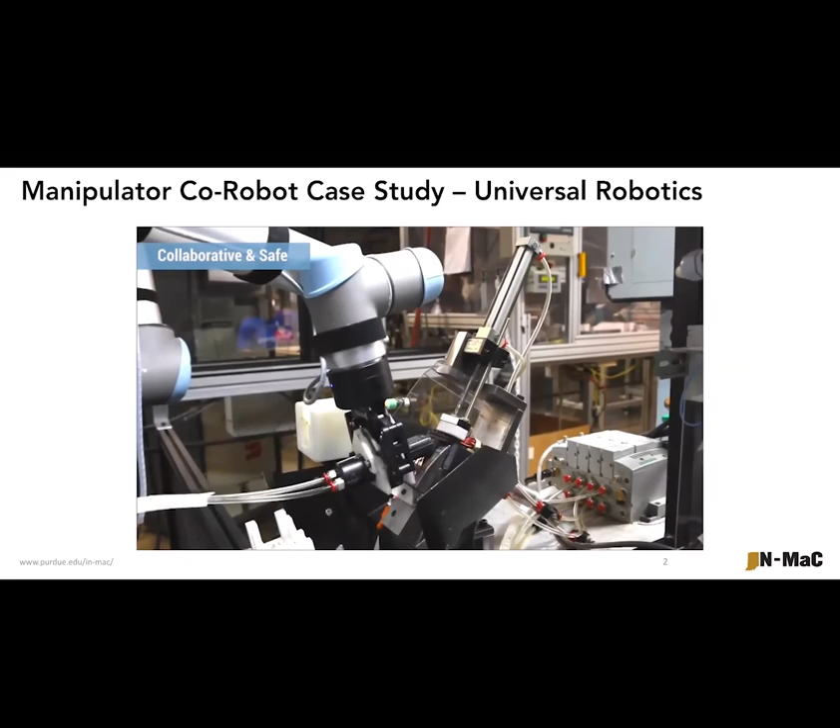We've got two robots working with humans. The first robot's actually cutting wires off of the motor stator. That's a potential carpal tunnel syndrome application. You're cutting about 16,000 wires a day by hand, so we thought that was a great place to put a robot and let it potentially get carpal tunnel instead.

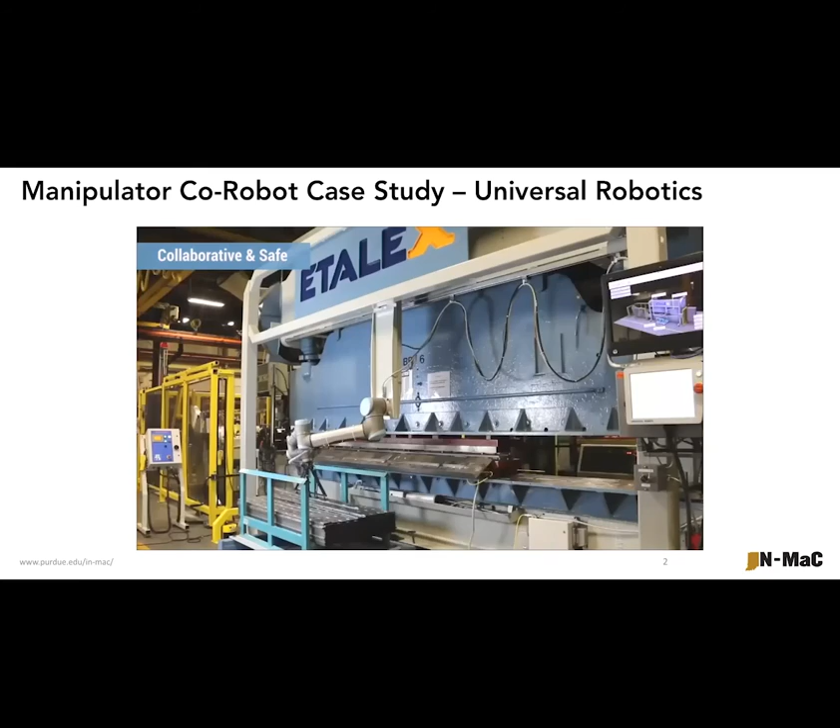The fact that the robot is a cobot, a collaborative robot, is important because I have no space in front of my production line. I only have 6 feet of space left, and it's not possible to install a regular safeguarding system. That's why I chose the universal robot for this application.

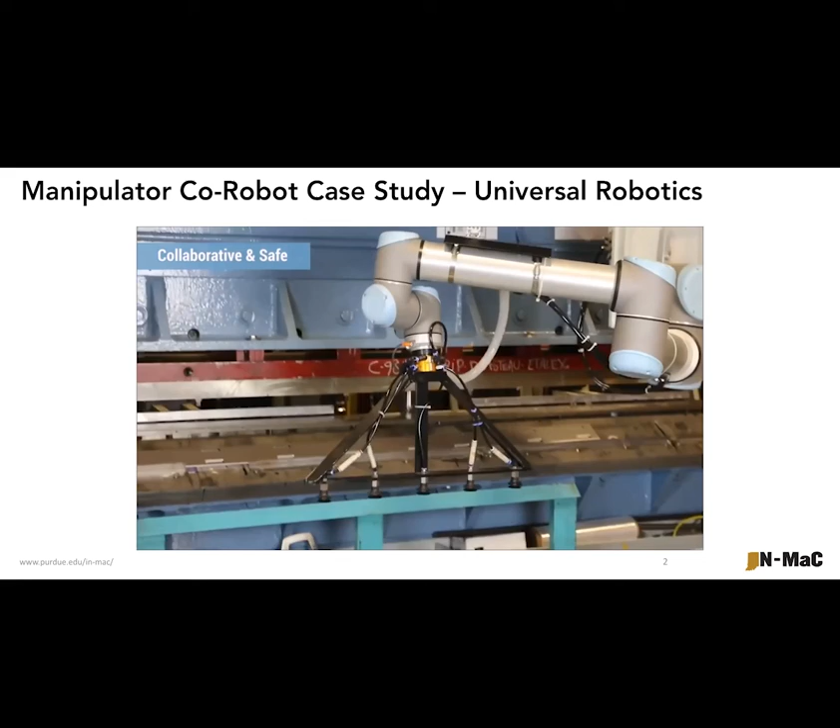With the universal robot arm, it's now at least 100% safer. Before, you had to put your hands close to the brake press, and there was a good chance that once in a while the brake presses would default and something could happen, an accident could occur at any time. With the universal robot, there's no chance of anyone getting injured.

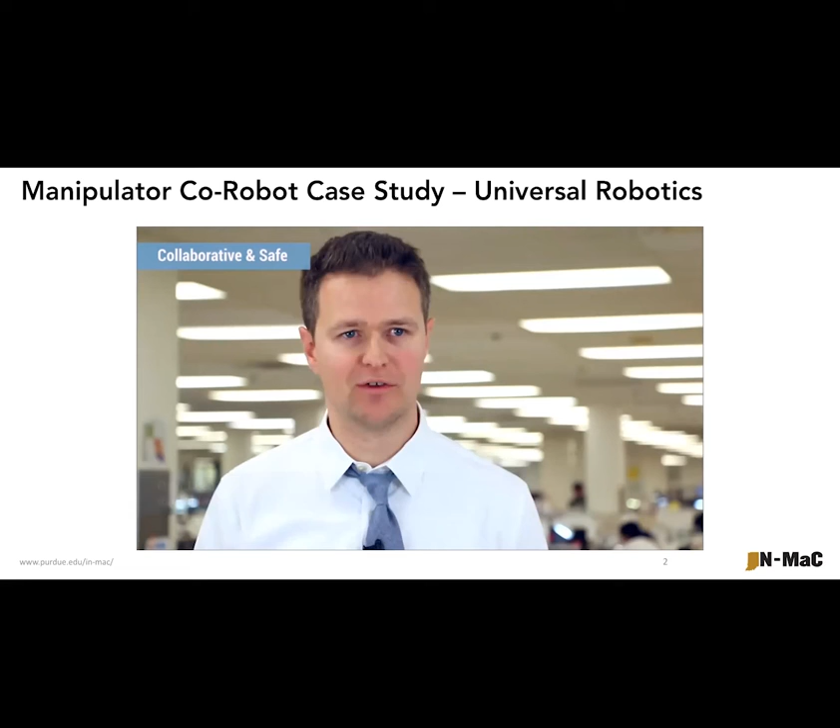In our history of automation here, we've used conventional industrial robots, and we had to build a large enclosure to separate the people from the robot, which takes a lot of space. It's extra cost, it's less flexibility, and it is a safety concern. If someone defeats the interlocks on a robot enclosure, we don't have to worry about that with the force sensing in the universal robot.

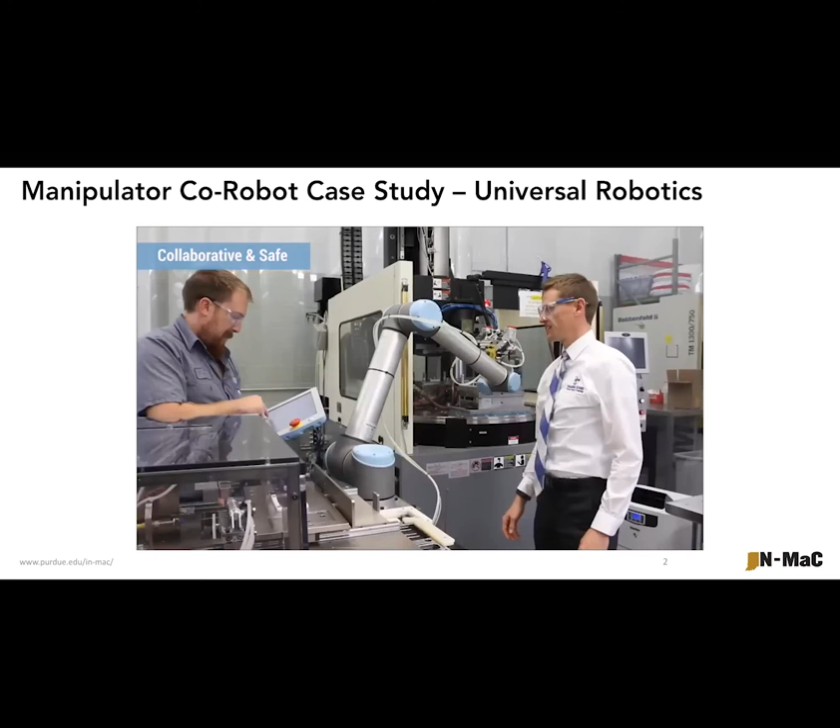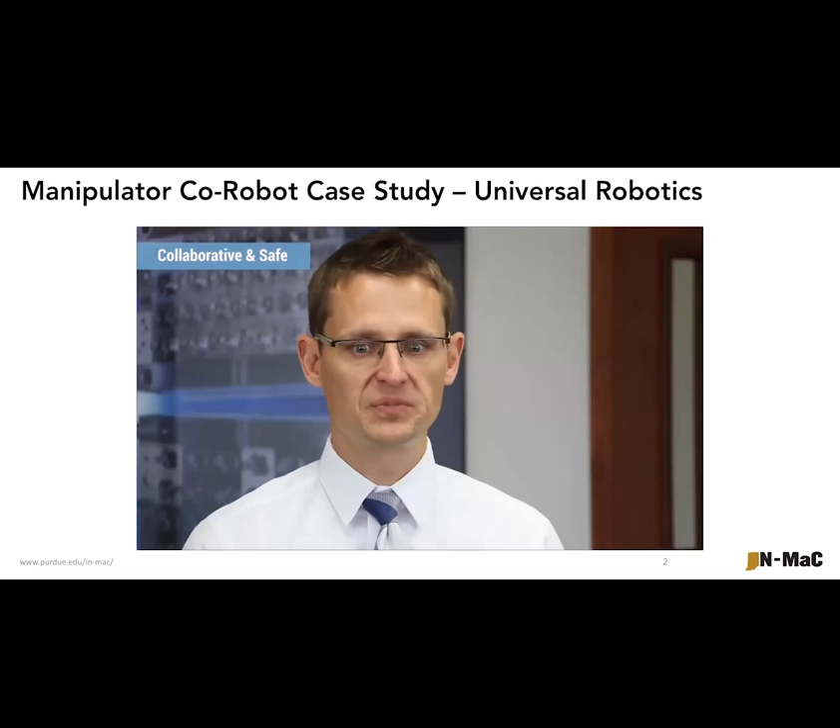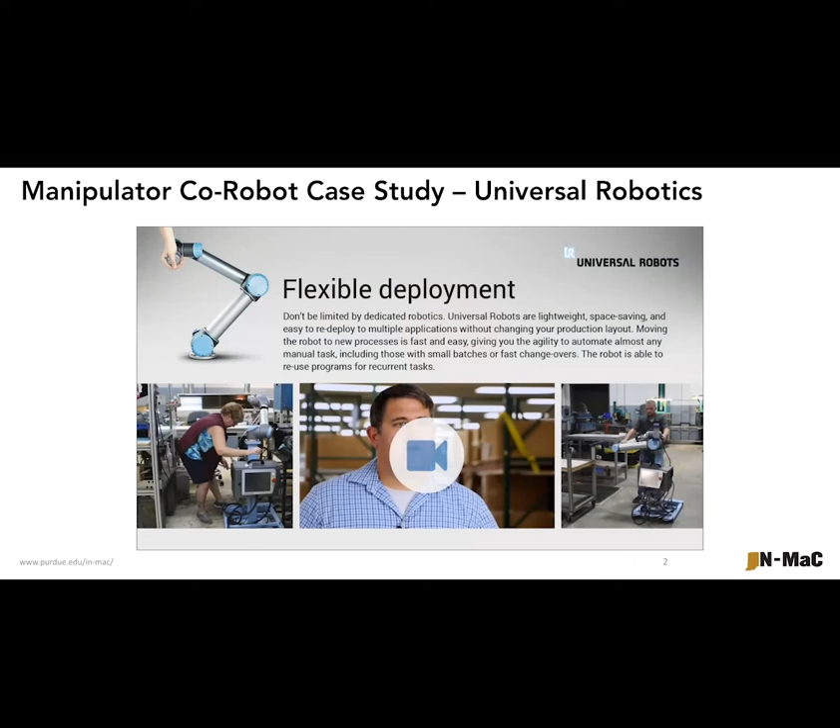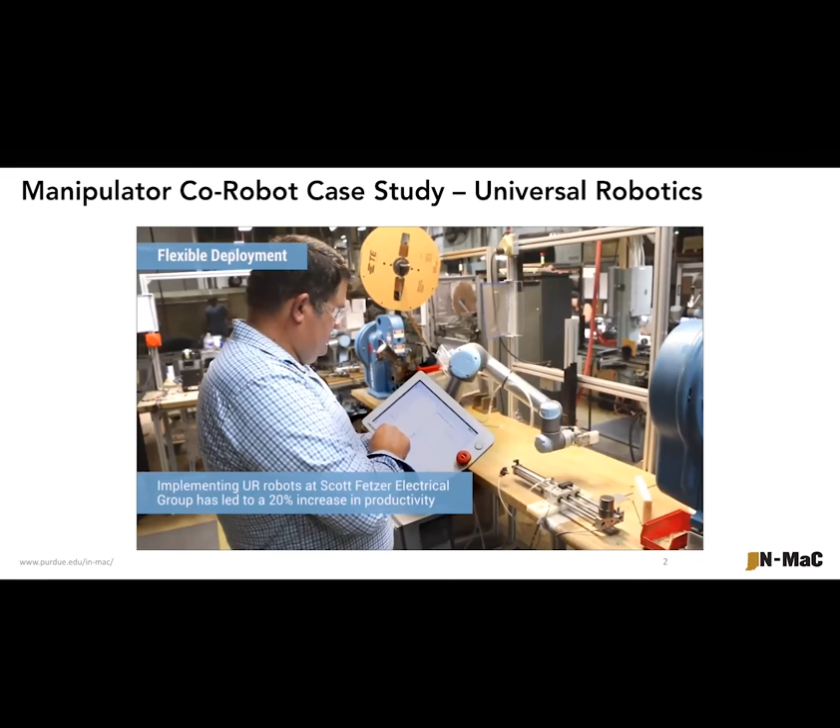When our workers come in the morning, their task is no longer to go do some monotonous task. It's to go take their robot and deploy it to whatever job it needs to do that day. And that robot's going to move all around our sheet metal department while it does that.

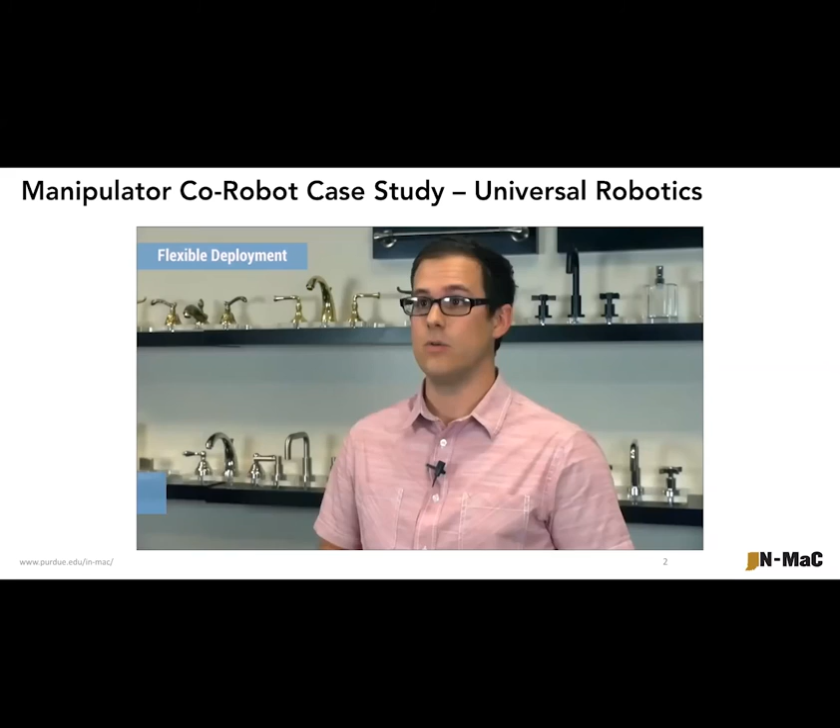When we do set up that first job, we'll do countersunk holes that will end up capping. So if it moves to another job and then comes back, it's simply just taking the caps out, remounting the robot arm itself. Usually it's going to take us about 30 minutes to get it back on the ground and powered up. And then after that, it's just as simple as loading the previous program.

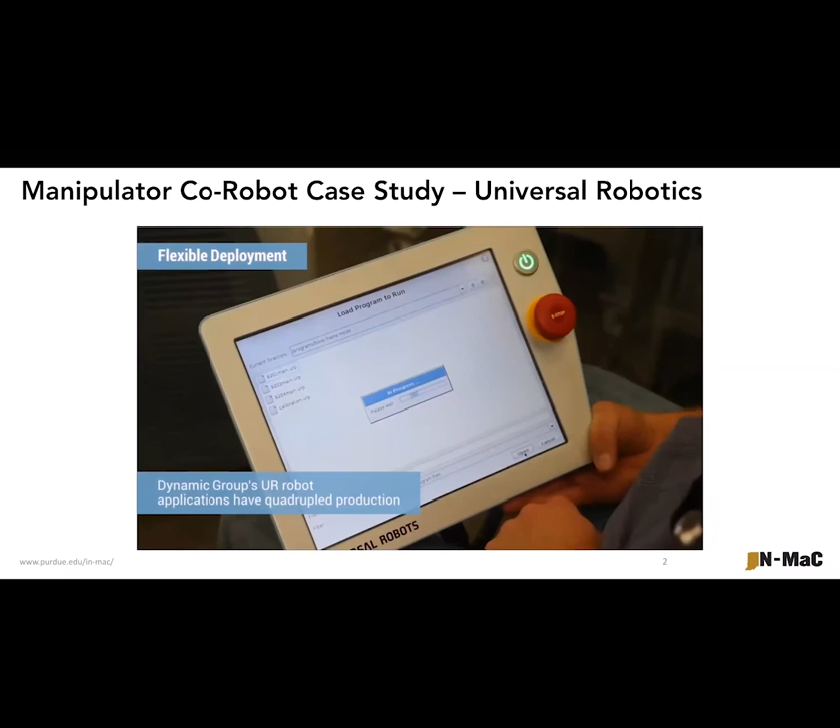We're able to quickly redeploy these robots to completely new tasks in very short order. We have all of the bases that we can transport around on wheels and slide them from press to press and application to application. That's been hugely beneficial to us.

So the last advantage is payback. And so the ROI, return on investment of this, ranges based on the particular application and configuration of the robot, but typically it ranges anywhere from 2 to 6 months.

So there's another type of collaborative robot on the market today, and these are called autonomous mobile robots, or AMRs. This first set of AMRs are used as autonomous mobile robot bases with various payload holding capacities, and they focus on material handling. Most can be outfitted with additional accessories for transporting or pulling items along the factory floor.

This next group focuses on order fulfillment and logistics operations. They're designed to work with human workers, bring items to them, instruct them what items to pick, and transport different items to the shipping areas.

The Fetch platforms also have mobile base robots, along with specialized robots for moving entire shelf units, reading barcodes for inventory management, and conveyor belts to help process work in progress on the floor and move from one machine to the next.

This next set here of AMRs are looking to automate forklift operations safely in the presence of humans. Again, they also have different size capacity vehicles for different applications, and they're useful for moving pallets around the factory autonomously.

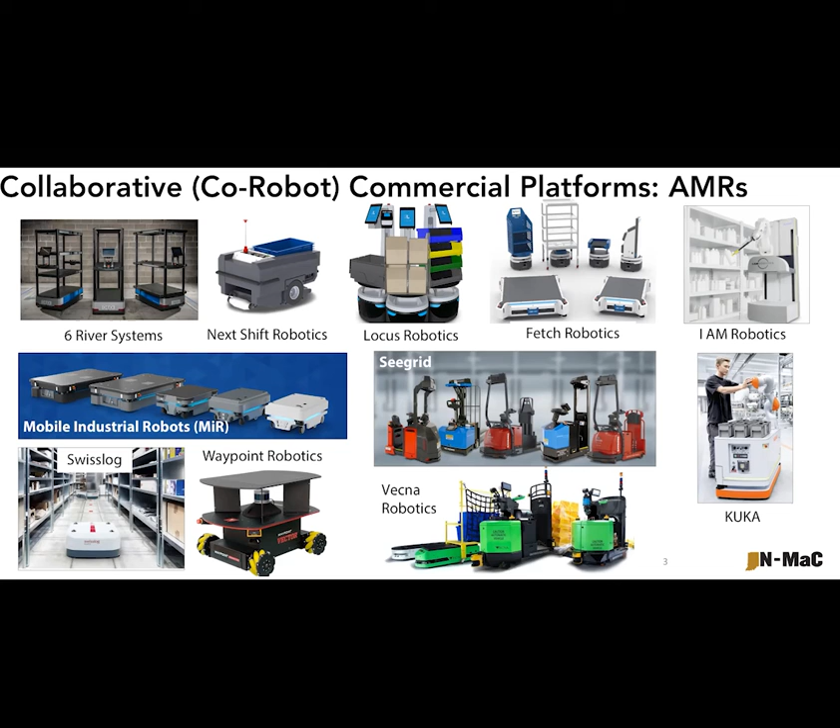And finally, in this last group here are what we call mobile manipulation platforms, and they combine a robotic manipulator like we saw before with a mobile robot base. They're designed for autonomous picking and kitting of orders, and just to basically be a mobile collaborative worker on the factory floor. So in this next video is a case study which shows one particular type of AMR, specifically the Locus Robotics platform, and see how it's been used for order fulfillment for this one particular company.

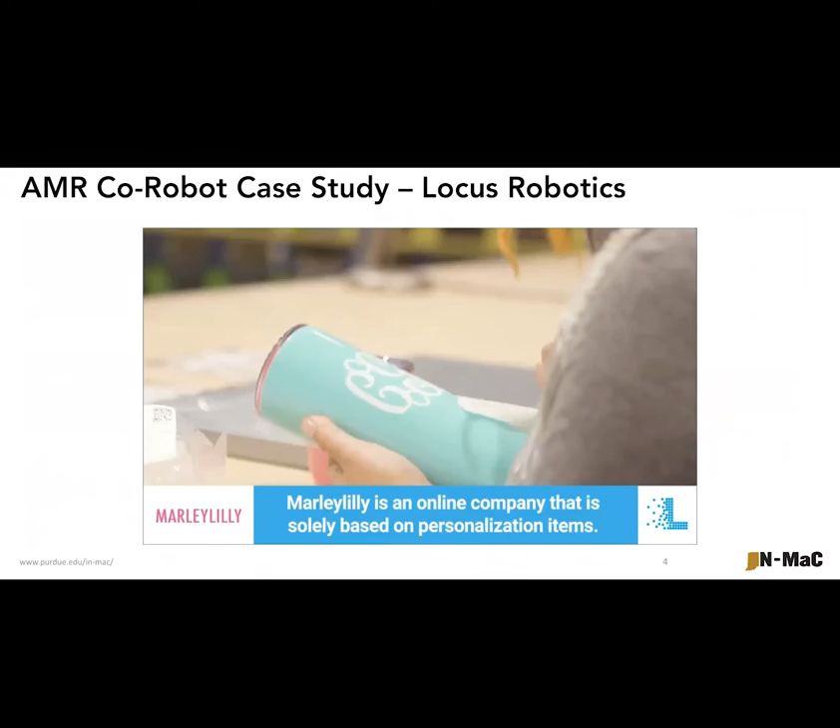Marleylilly is an online company that is solely based on personalization items. Every item is personalized and shipped out to very happy customers. Because 75% of the items that flow through our facility are customized, it makes it challenging to collect those items to ship the customer one package instead of multiple packages.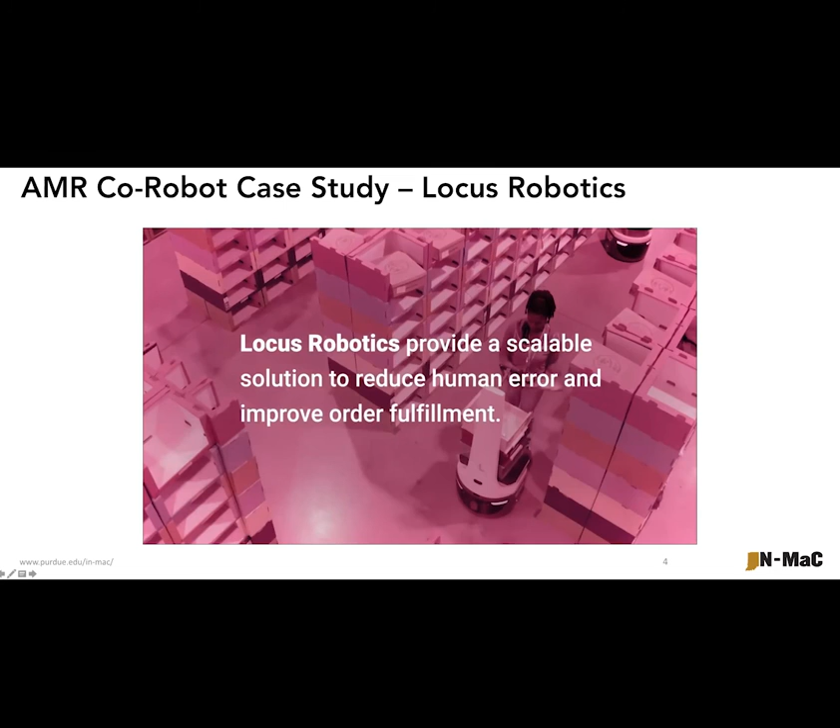I was a little skeptical. I've never worked around robots, dealt with robots at all. The deployment process was actually quite simple. Our IT team worked with the Locus team to develop the solution on the back end. And I was actually quite surprised because when we went live, it was fairly seamless.

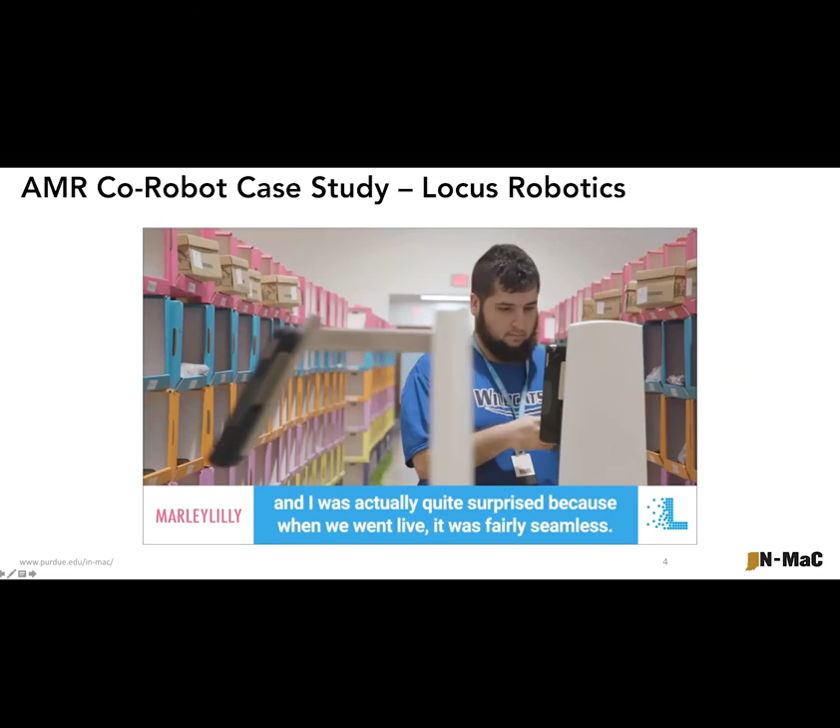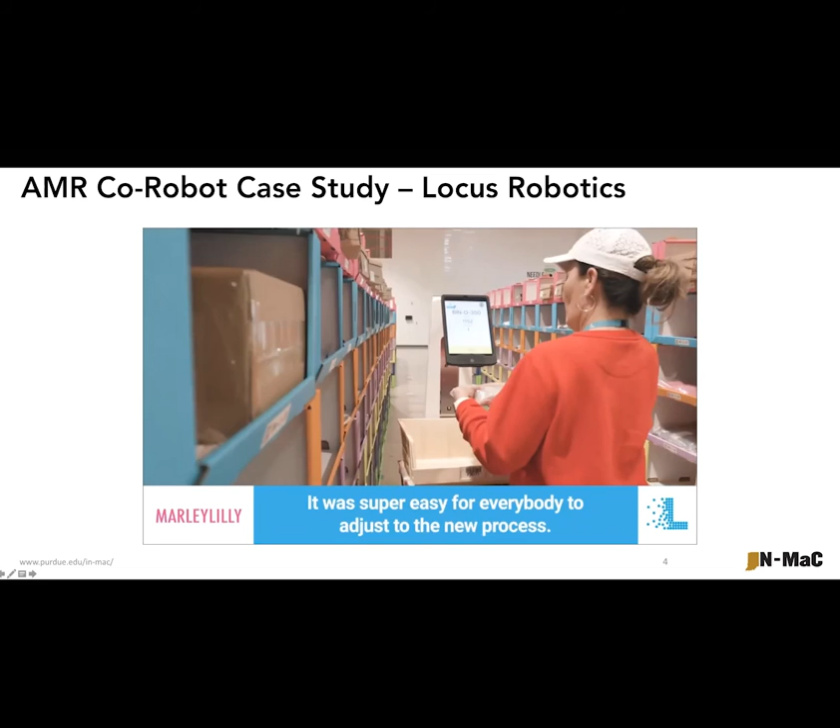The most surprising thing was honestly how they pretty much do everything for us. It was super easy for everybody to adjust to the new process. It truly is impressive the way that they can guide themselves and direct themselves around the facility without running into anything else. They really do have a mind of their own, but it's a controlled mind.

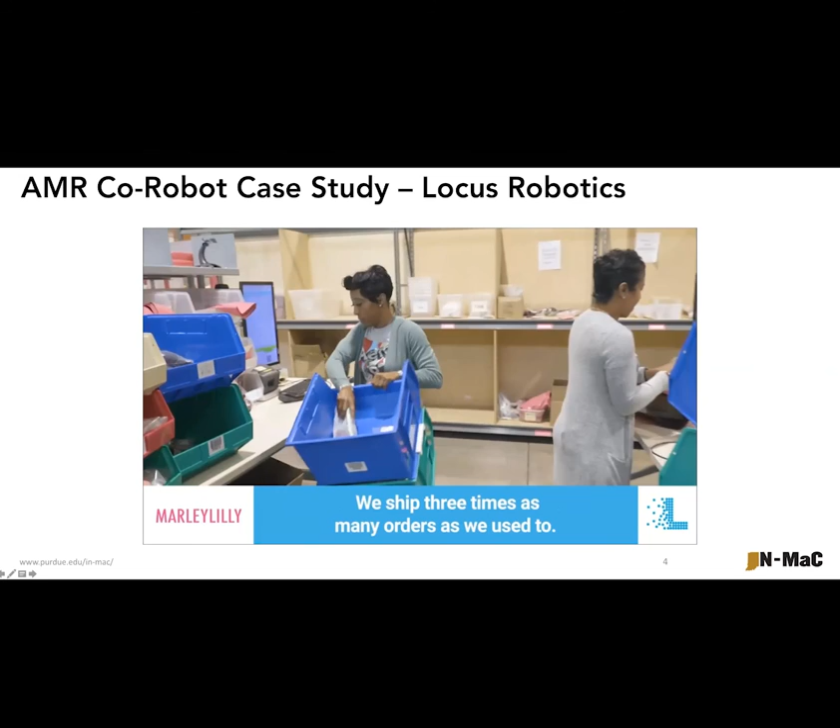We are much more efficient with Locus robots. We ship 3 times as many orders as we used to. Basically, our entire fulfillment process was changed when we migrated to Locus. The dashboard is a great tool that we use to monitor how many picks per hour we are getting out of our employees. And now we can go in and review an employee's productivity at a moment's notice and make corrections very quickly.

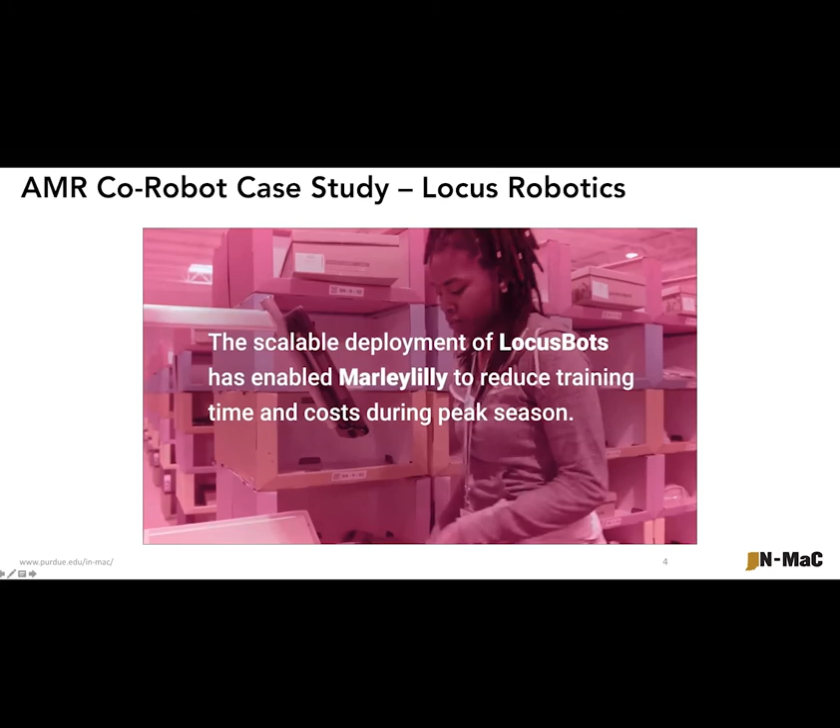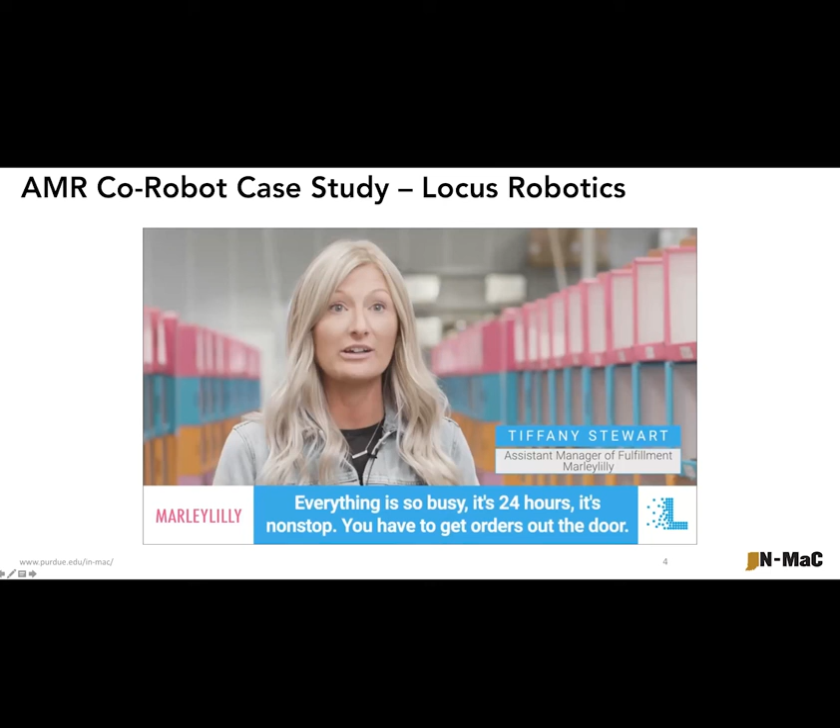Peak at Marleylilly, if I could describe it in one word, is fast. Everything is so busy. It's 24 hours. It's nonstop. You have to get orders out the door, and Locus Robots helped us with that a lot this year. Right now we have 15 robots working here. During our peak season, we upped that number to 25.

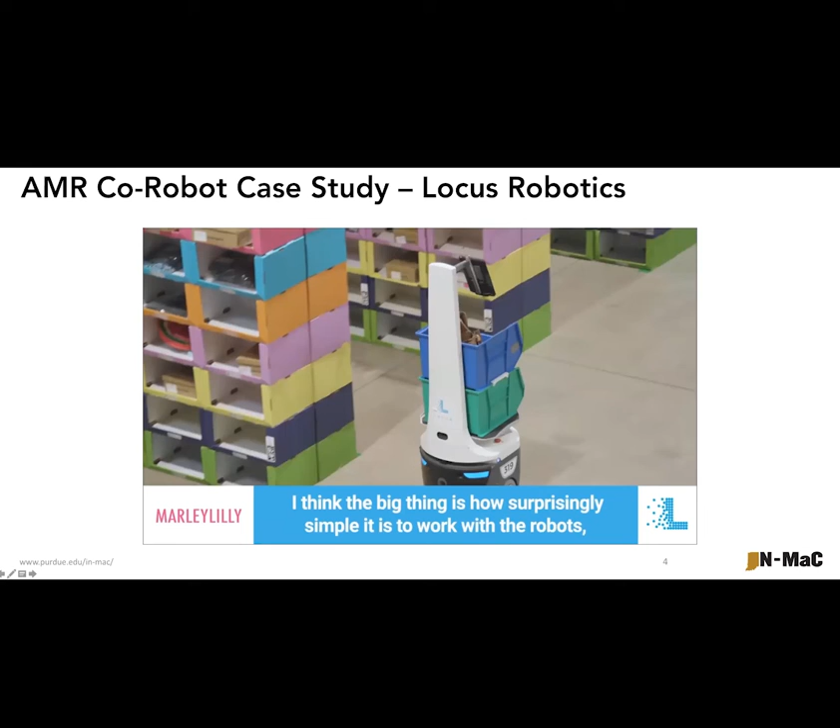It made everything a lot faster, a lot less looking around for missing items. It was, I'd say, the most efficient Christmas we've had during peak season. I think the big thing is how surprisingly simple it is to work with the robots. And it's not that we're eliminating human jobs, we're really just increasing the efficiency and optimizing our pick operation.

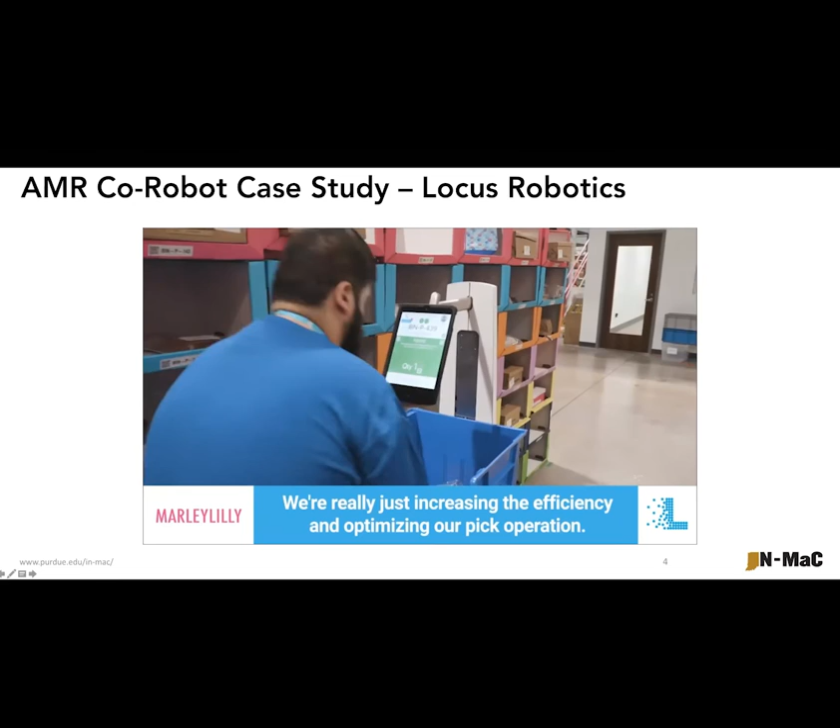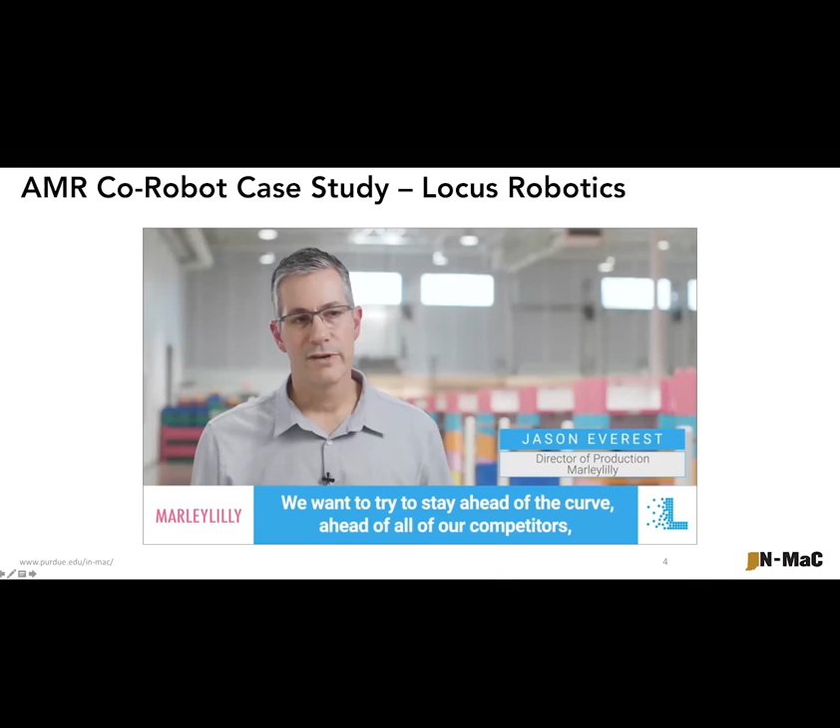We have grown so much in the past 7-8 years, and so we've implemented a lot of new processes. Locus was one of the largest processes we implemented and the smoothest. We want to try to stay ahead of the curve, ahead of all of our competitors, and in order to do that, we need to stay technologically advanced. And I think Locus is one avenue that will definitely help us reach those goals.

Okay, I'm just going to switch out from this for a second.

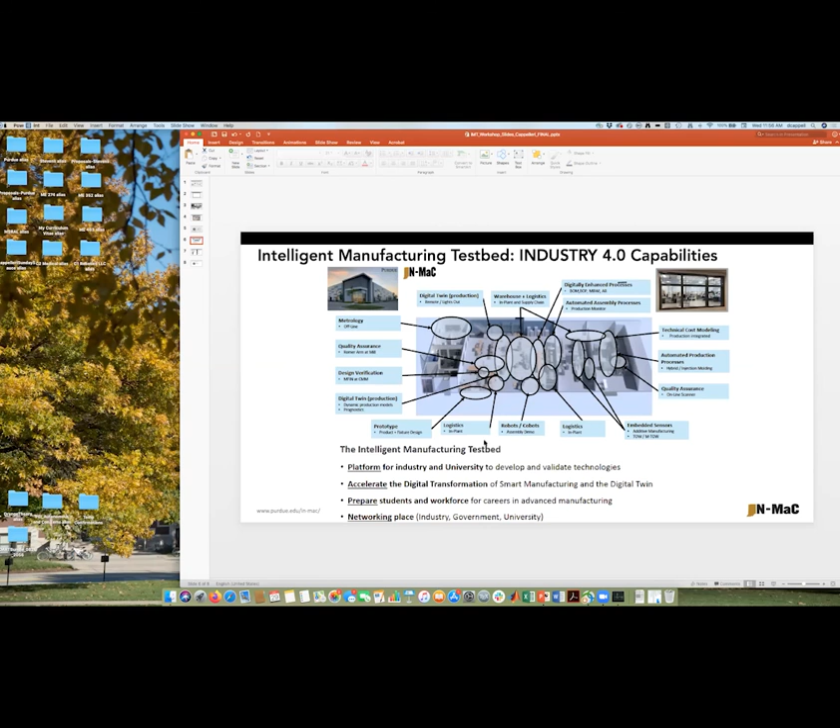So we have a number of different co-robots here at INMAC and the test bed. Specifically, we have this Fetch and Freight robot from Fetch Robotics. The Fetch is a mobile manipulator platform, and the Freight is an autonomous AMR. These robots can work individually or together to carry out a variety of tasks.

So in the future, we're going to be hosting some workshops where users will get to learn how to use and program these different cobots for various Industry 4.0 tasks. Please stay tuned for when those will be available. We're allowed to do those after the COVID situation has wrapped up.

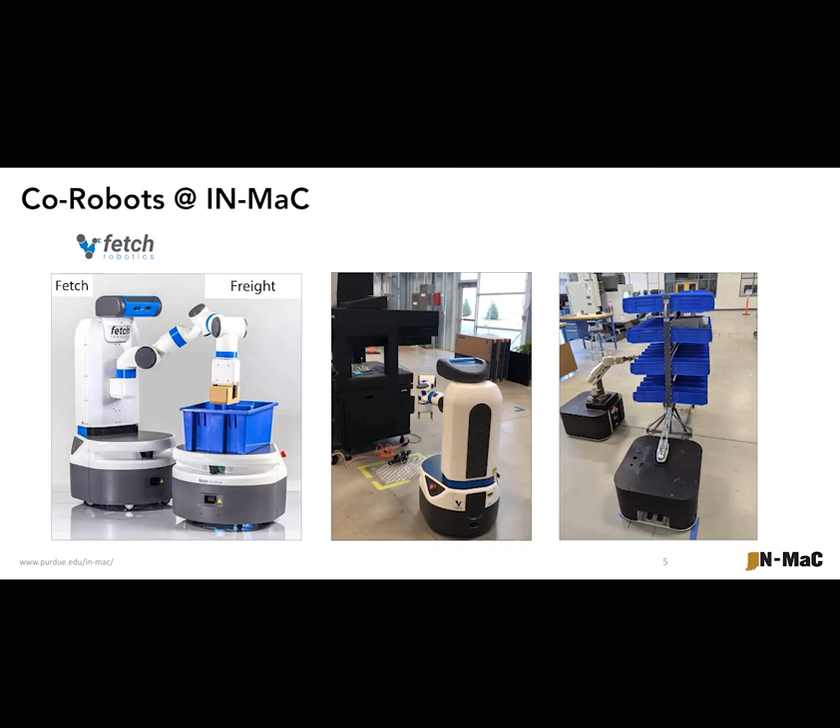Okay, so just to conclude, I want to reiterate we have a pretty neat, unique intelligent manufacturing test bed here at INMAC, which can be used to showcase and demonstrate different Industry 4.0 capabilities. We touched on the technical cost modeling and collaborative robotics components of the test bed in this workshop, and other workshops have touched on other aspects of it.

In addition to what we've shown here for the co-robot applications, we're also working on integrating machine learning and big data, and studying the mechanics of motion for robots to enable autonomous intelligent behaviors, improve their robustness, and allow them to adapt to various situations. So again, please think of the test bed as a platform for industry and university to develop and validate technologies, accelerate your digital transformations, help prepare students and workforce, and also as a networking environment.

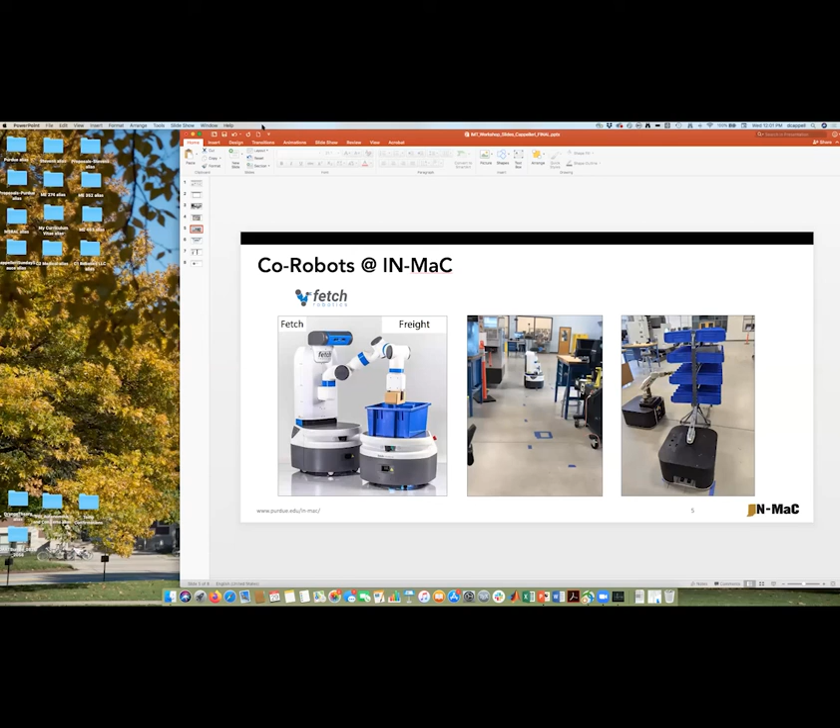I don't think we have any current quality check applications with co-robots currently. We do have some coordinate measuring machines, some mobile surface and gross measurement capabilities, and of course some co-robots. A lot of things have been delayed due to COVID in getting applications up and running, but that's certainly an opportunity we're equipped to do and would like to talk about.

In addition, as regards dimensional checks on a more traditional robot, there is a Hexagon Leica scanner, featured in Professor Munson's video outside of the injection molding machine. It's a high resolution laser scan that provides a very timely check right at the machine, through a Leica scanner through one of our partners. So that's a demonstration we have, but we're certainly interested in developing new tools and demonstrations as well.